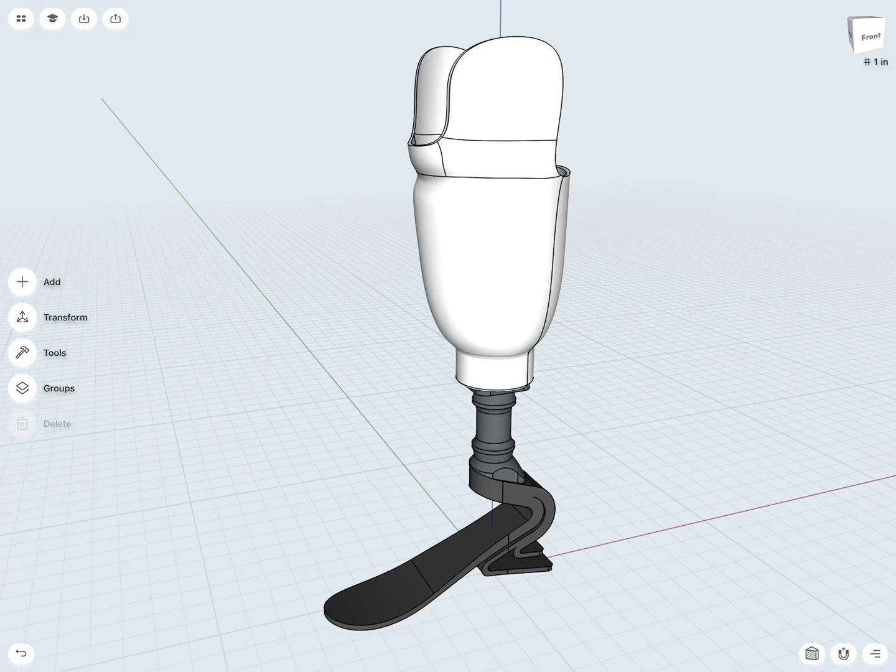Hello everybody and welcome to today's webinar in which I will show you how I would use Shapr3D's sketching and modeling tools to create everything you see under the white body, which is part of a prosthetic design and consultancy project I currently work on for a local prosthetic design company.

Before we continue, a few things to set up. As always, we can go to units. We want to make sure that we're not working with inches, we work with millimeters because we have to work in very small dimensions. So millimeters is very good to work. In appearances, based on preference, you can hide these edges. I keep them off for the moment. And on the lower area here, currently we turn snap to grid off.

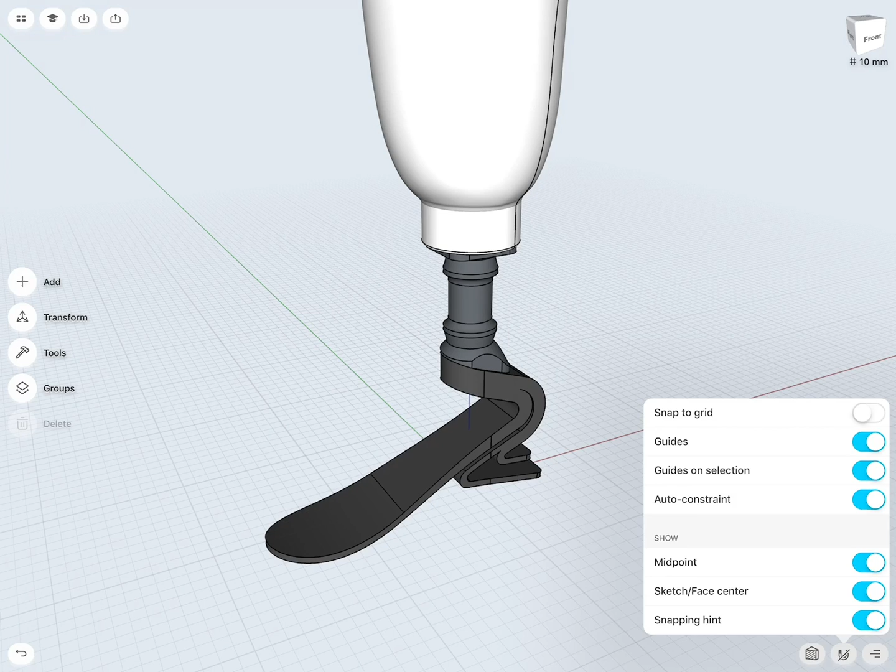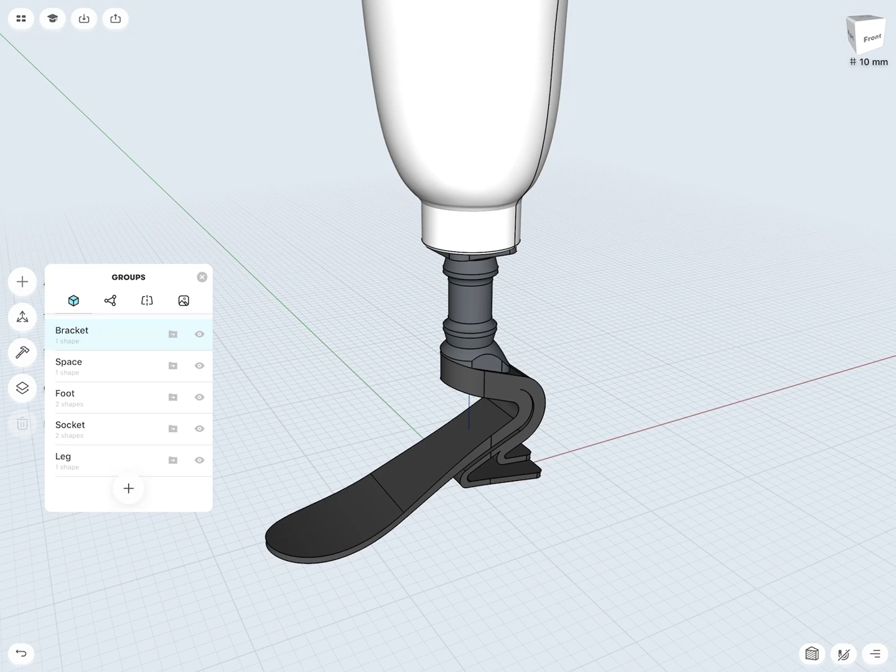The way I will structure today's webinar is simply with this geometry that's already built in as a backdrop. I will show you via sketching over the parts how I would construct all these individual elements. Also in terms of design management and improving your ability to quickly work on particular elements, you want to put nearly every object into a group. So I have the leg, the socket, the bracket, the spacer, and for example the foot. While the foot is made out of two parts, I just put this into one group. Okay, so let's focus on those elements we see here.

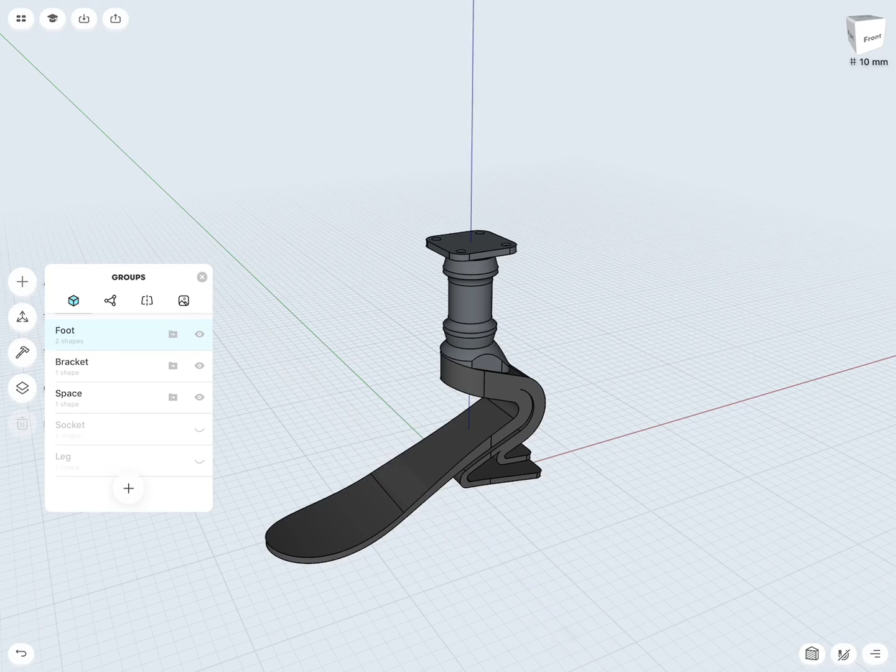What is really a good tip is try not to work somewhere off center. Try to really create your sketches and your model so it's nicely centered. For the simple fact, if we now go into the front view and then lower right corner, you see where my pen is. There are three icons. To the left, it looks like a piece of cheese with dashed lines. If I tap this one, you will see a cut section view.

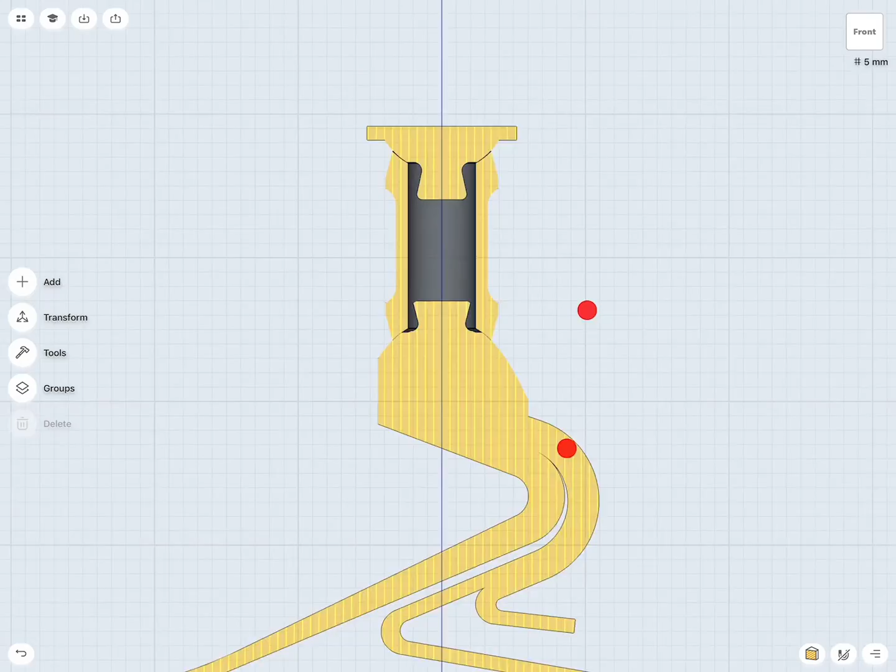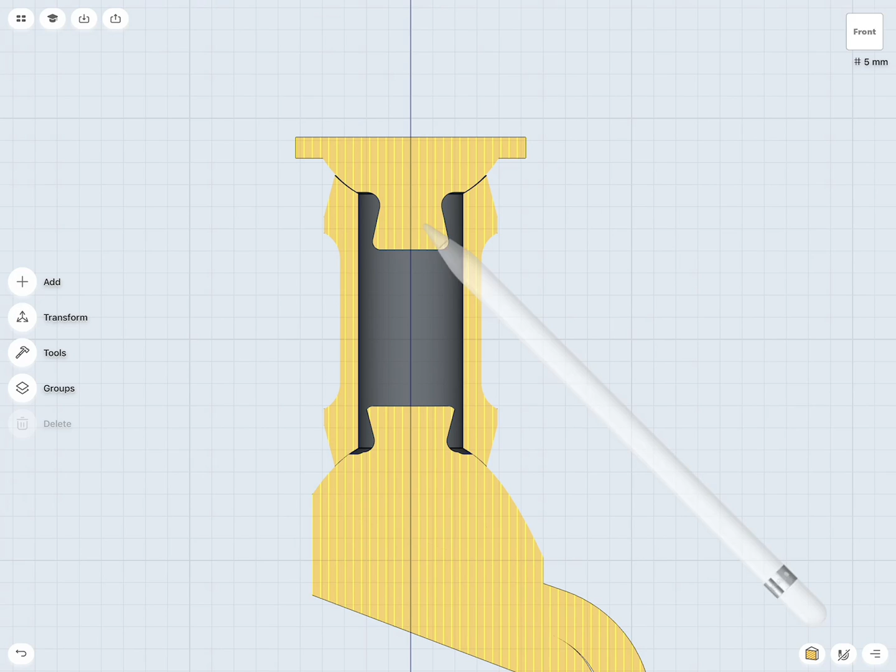And that's actually pretty great when we create geometry and then we want to look into everything to see if there is any interference. The way those were made, you see there are small gaps so they can rotate, because what's not in the model, there are actually some screws that are being pushed into this body, and with this they will secure the angular parts of the foot and the bracket.

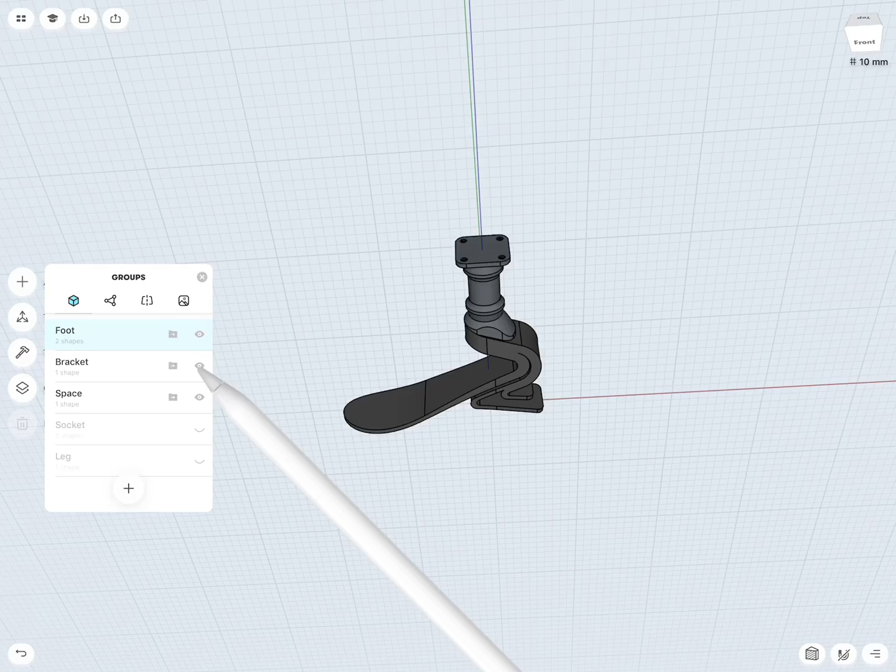Okay, so as an easy start, something I always tell my students, if you see a design like this, it might look very complex. Don't be afraid. Successful 3D modeling is really about trying to break everything down into the most logical elements and then step by step solving one problem after the next one. As a nice warm-up, let's take a look at this spacer. So this is not a custom designed piece. I can actually put it here. There you can see there are actually the screws. So this is something you can obviously buy.

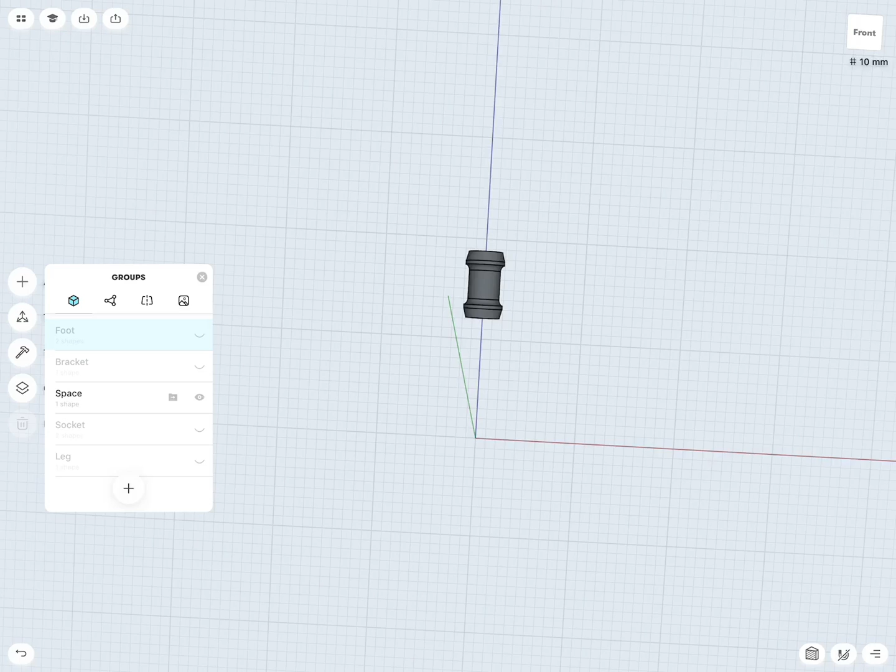Prosthetic design, particularly in today's time, when you do something for children who grow, you need to figure out how we can create these parts fast, maybe 3D print, which is a really nice technology today. So relying on custom parts is good. Being able to 3D print those and mass produce them quickly is better. I will create a new folder because I will use this as a sketch over. Then I turn on the cut section, so you will see what we are trying to do. Now, if we break this down into the individual elements, we have vertical lines, we have some curved elements, and here and there we have concave surfaces that work like the holder for a socket.

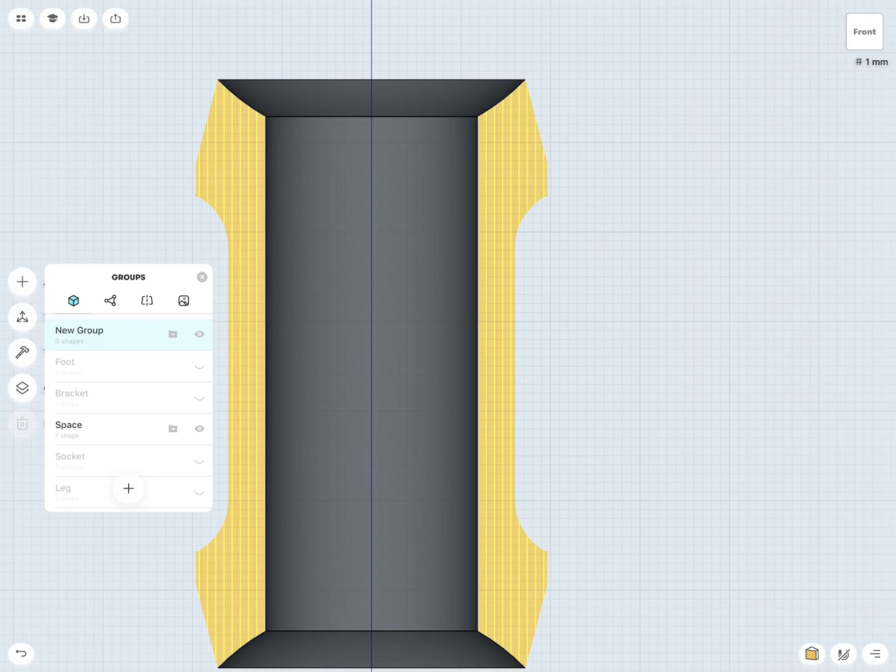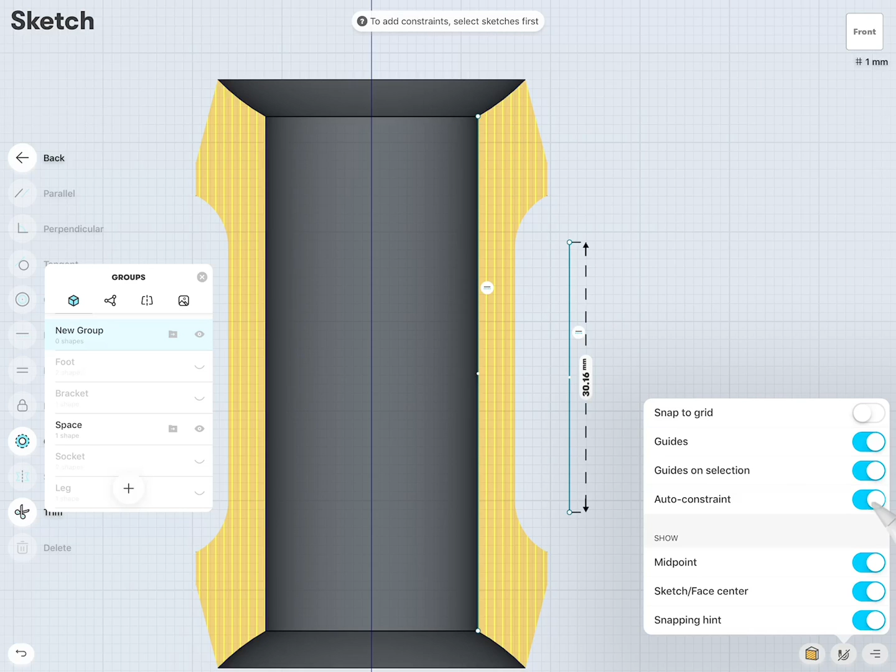So to create this now, I will draw the sketch here to the side, so you see a little bit how I do this step by step, and I can move this to where I need it. I have the grid turned off, so I'm freely able to move these elements to where I need to. Here I have a line, and I didn't mention this before, auto constraint is also turned on. You see this line which I drew straight vertical got a vertical constraint. If you draw this at an angle, not a big deal. Select the line with the pencil, and then on the left there's a horizontal vertical constraint, and we can fix this. Very good. Then I move this one to there.

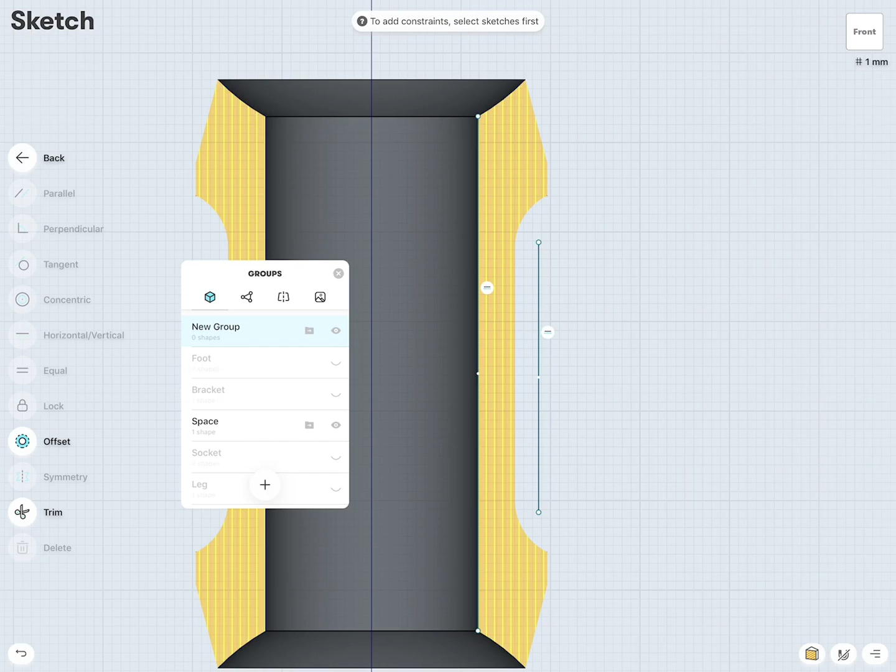And these two lines I would like to be aligned vertically. How do we do this? The lines in the new version of Shapr3D display the midpoints. And I can draw a line from a midpoint to the other midpoint. When I select this line and make it horizontal, now the two lines, this one and this one, are vertically justified. Let's bring this one back. This also means if I move this one up and down, you see the other side adjusts. So it's really quick to do this.

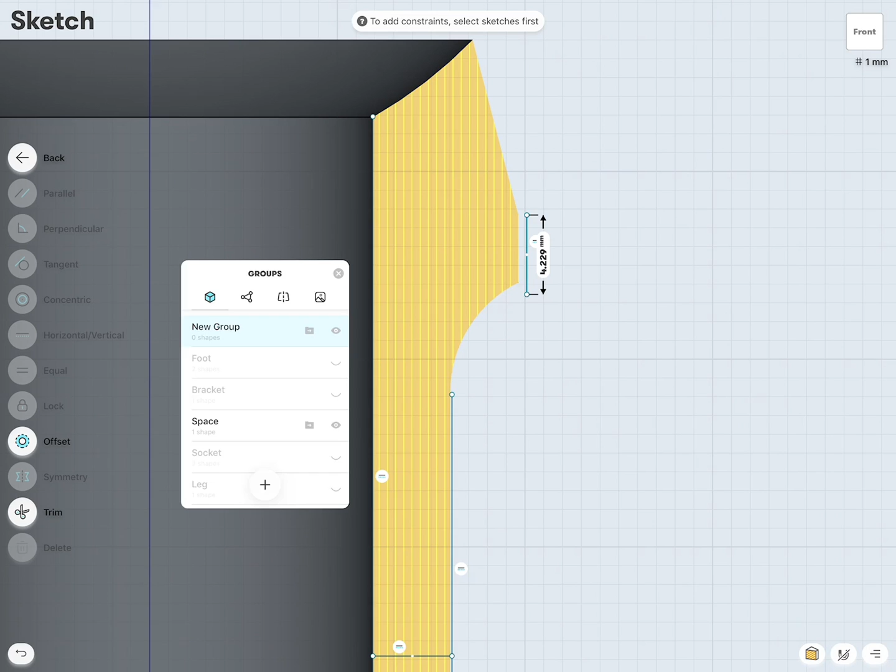Here, this looks like a vertical line we have kind of there. So I bring this line to there and there. Get this a little bit closer. Zoom in. For those who are new to Shapr3D, you see what's really nice with the grid is when you zoom in, it actually gets finer.

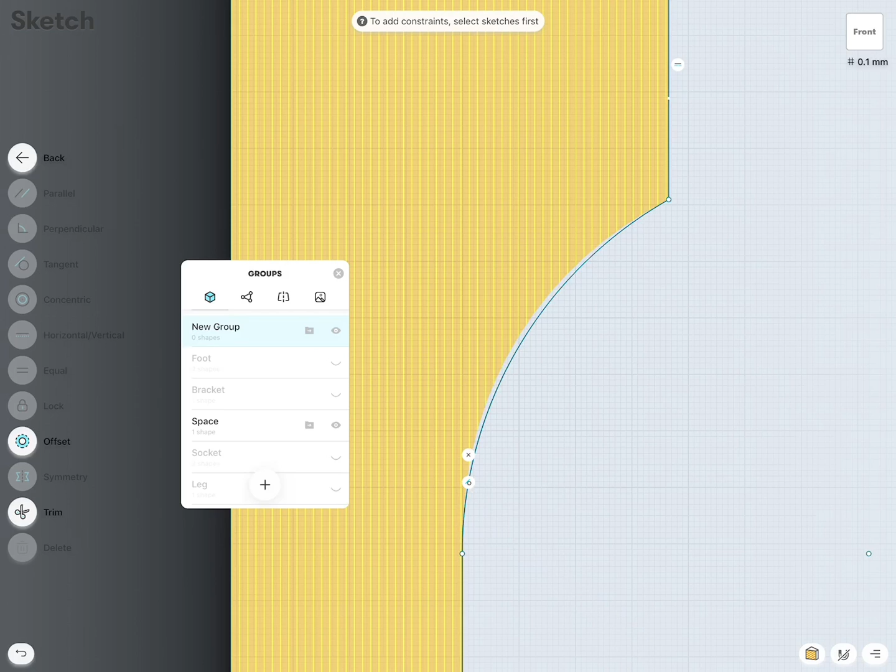And now I would like to connect an arc from here to there. So with the pencil, I started drawing from there, and then I wiggle my pen and move this point to the end so it snaps. Very good. And there you see, there we also have this constraint for tangency. In case somebody does not see it, what this means basically is that the arc perfectly tangentially flows into this line, which is what we want. So we can select the arc and the line, click tangent, done.

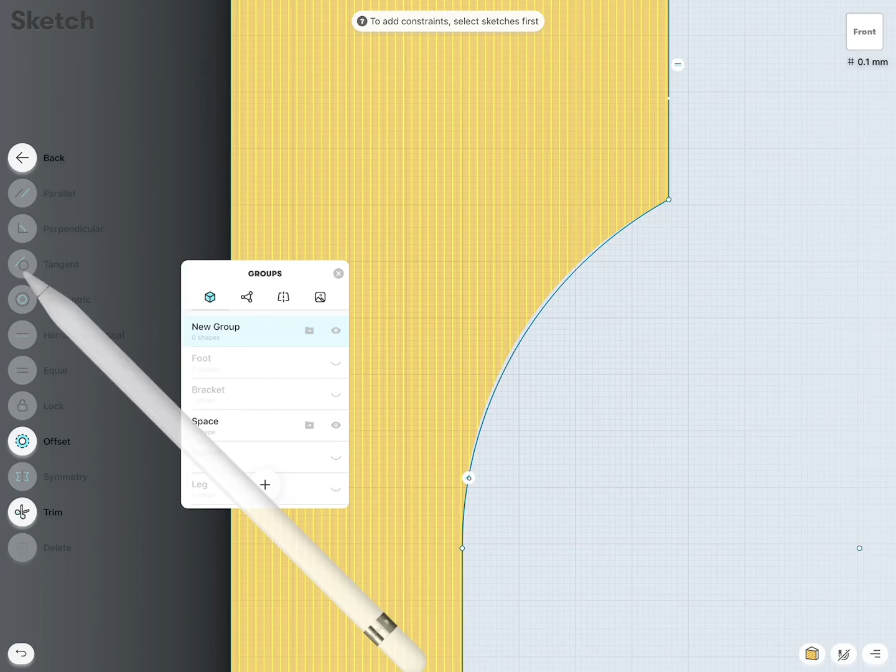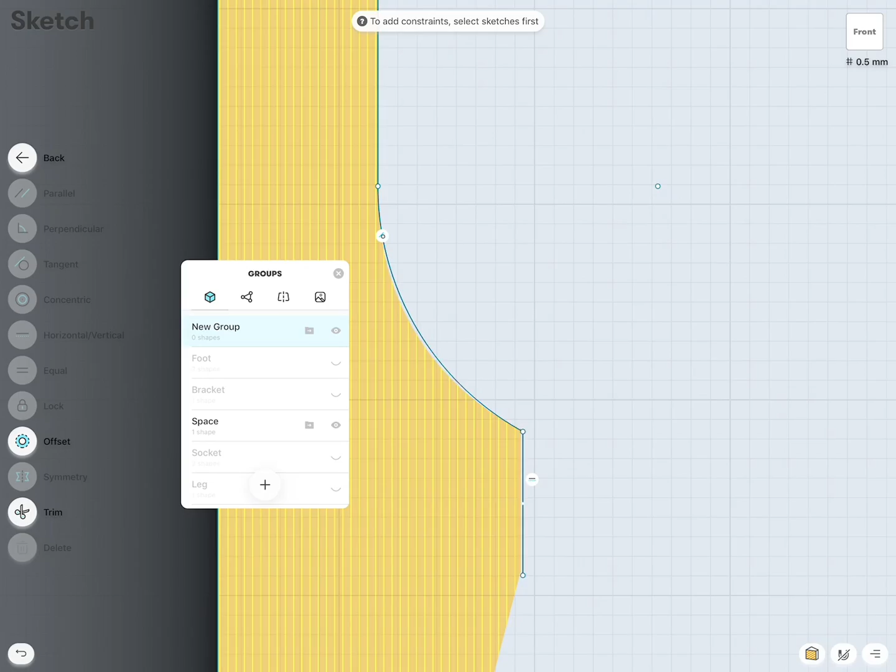Let's do the same down here. We draw a line, then we draw our arc. The tangency was created, and at this point I can position to there. If I want to, this line, I can give a dimension 3.5. Let's clean this up a little bit.

This line on the bottom I can give the same dimension, but to make life a little bit easier, in case I adjust the upper line, I select both lines, and then I will give them the equal constraint. And that basically means the lower line is always as long or equal as the other line. Let's make this one 6, and you see the lower line updated. So it cuts your work by 50% down, which is good.

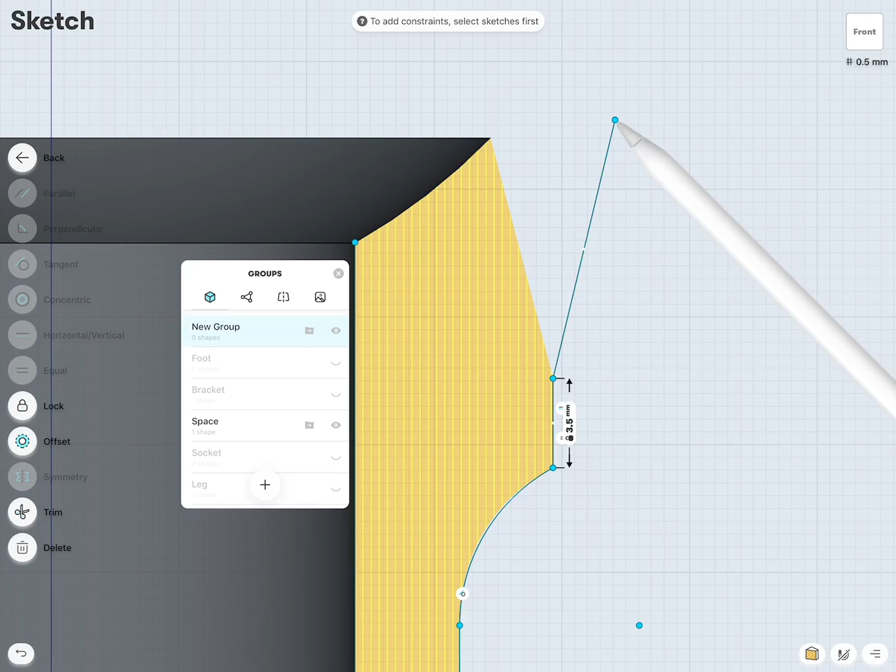Then from here we draw a line. You notice drawing a line out, because I'm working in a cut section view of the 3D geometry, the software tells you it's not so easy. So instead of drawing from this point a line away, I draw from somewhere else and terminate the line at this point. And then, whoops, the upper point I select with the pencil and move to there. Very good.

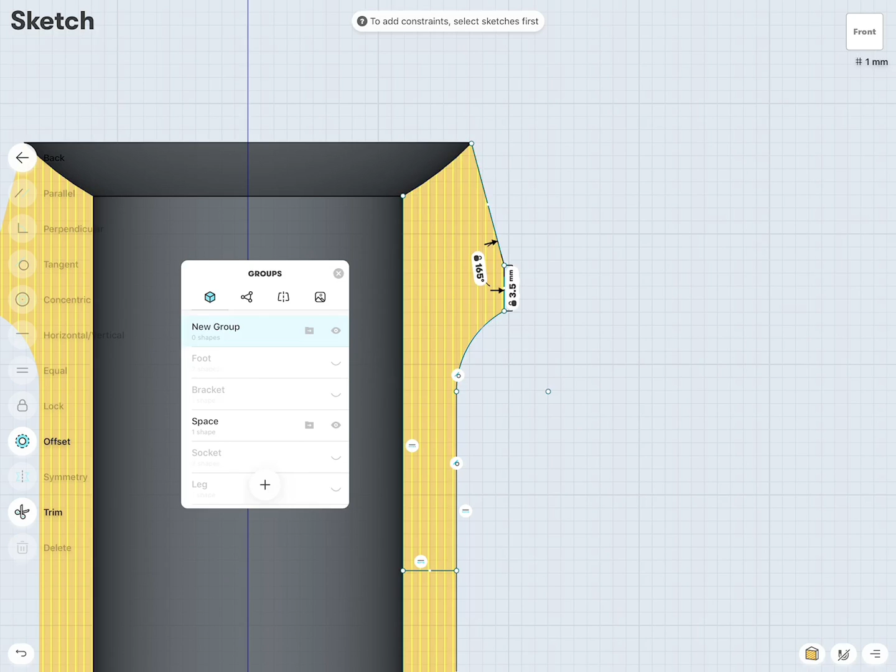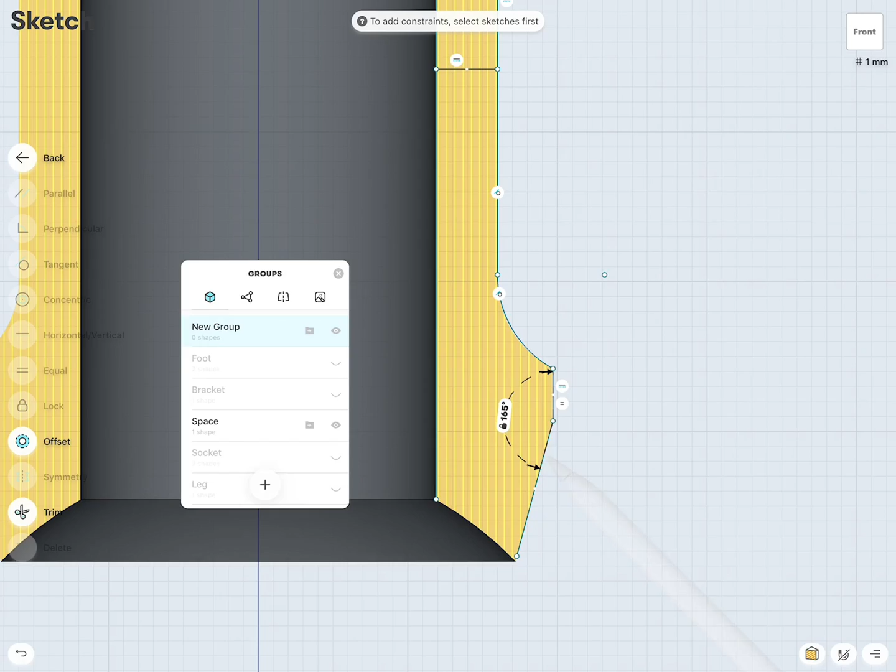To specify, we can also give this an angle. So with the pencil I select both lines, 165 degrees, and say that's locked. Also here we can give this an aligned dimension. So let's do the same here, 165 for the degree. And then this line and this line. Careful where you click or tap. We make it equal. Very nice.

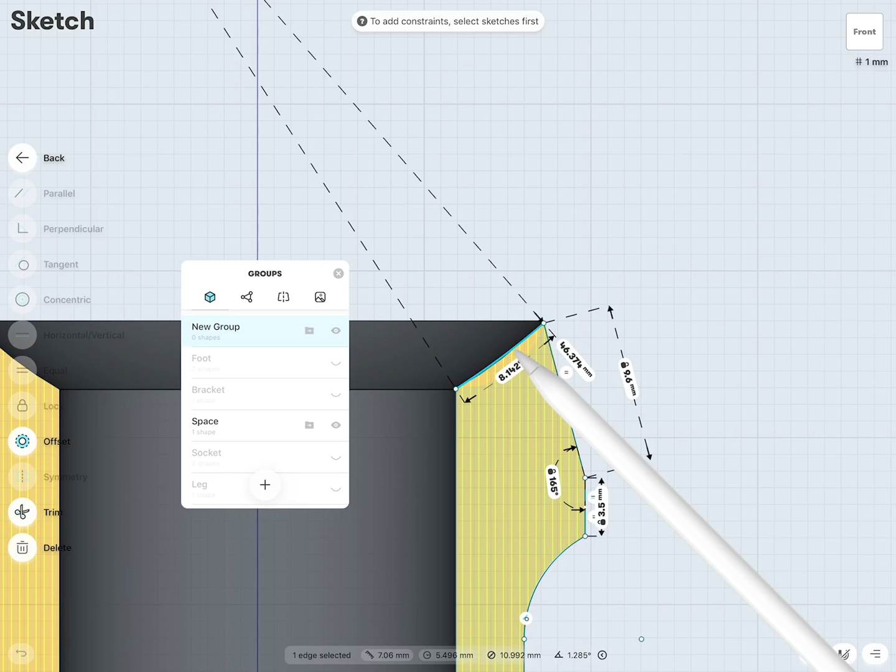Good. So how do we solve now the arc? I will turn off the spacer group, and then from here draw myself an arc. I can then actually show the spacer again. And I need to adjust the radius now. So I can, with the pencil, drag the arc, and it looks like maybe, let's say 9, 12. Oh, this one moved a little bit. So maybe by hand, via dragging, we can do this 12.

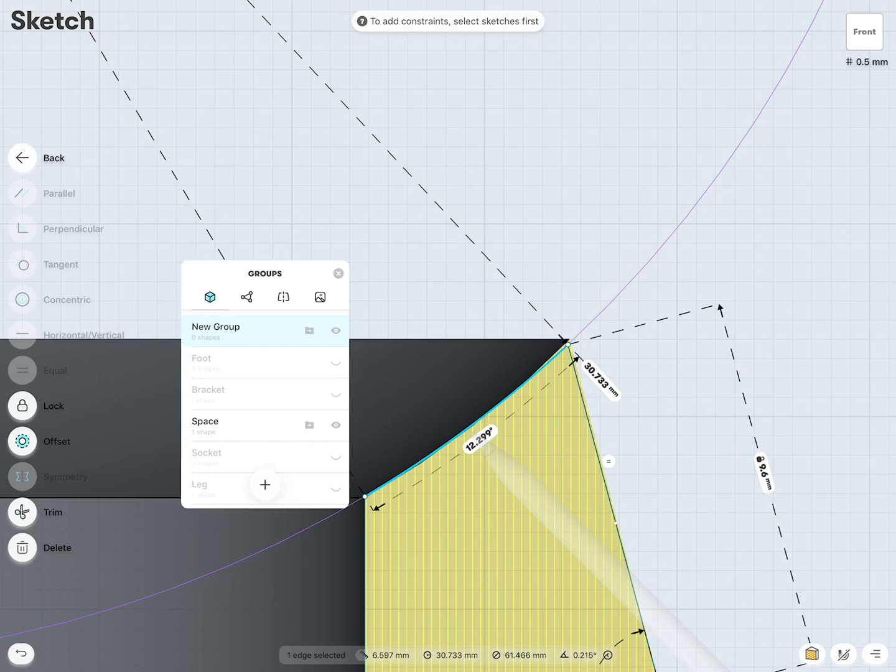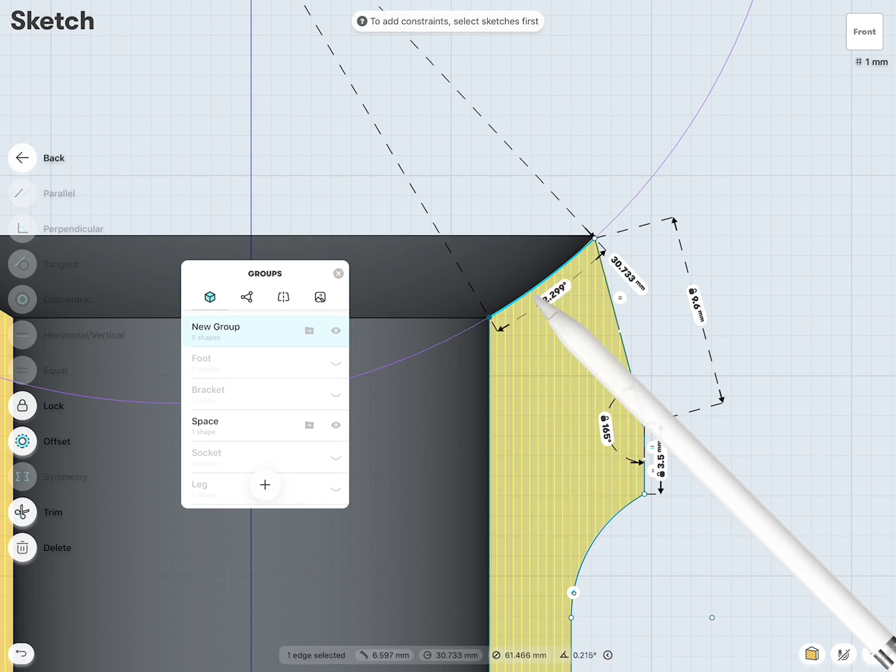Okay. So one little tip, also you notice when I type in a different angle here, the sketch adjusted, see this line moved. To prevent this, I can select this line and on the left add the lock command, and that basically stabilizes that line. So when I add a different angle there, now we have the opposite side, so we have to lock this too, and now we can specify this as needed.

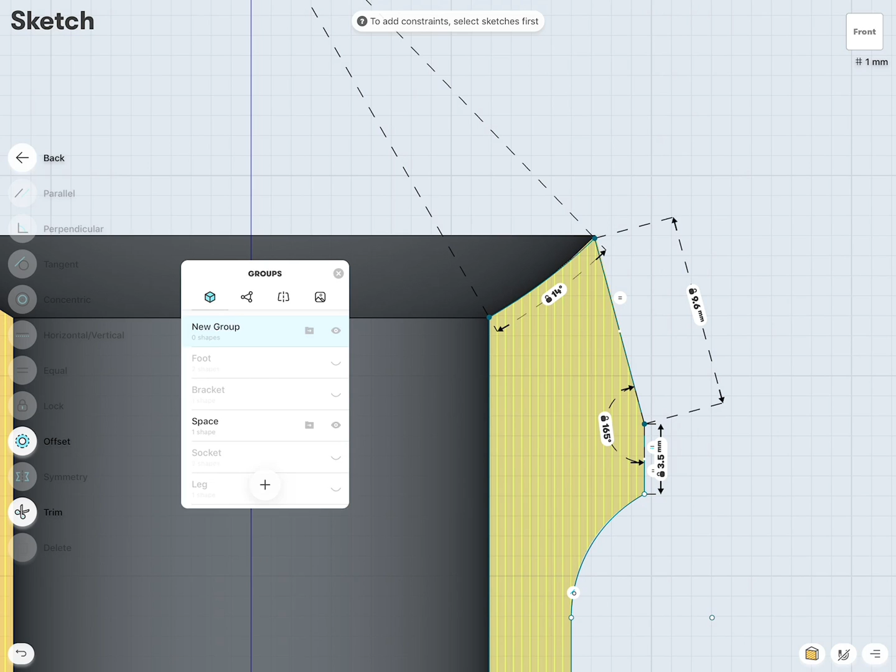So why does this happen? For those who are not familiar with it, this is a sketch solver. So with all these constraints, what you see on the left side, these icons and dimensions, we try to create a rigid structure. And the solver always tries to, well, solve automatically what it assumes we want to do. That is sometimes very easy to do for the software and sometimes not so easy. So we help it by giving it some extra constraints, like locking these lines, so I can now give a dimension to the degree of that arc.

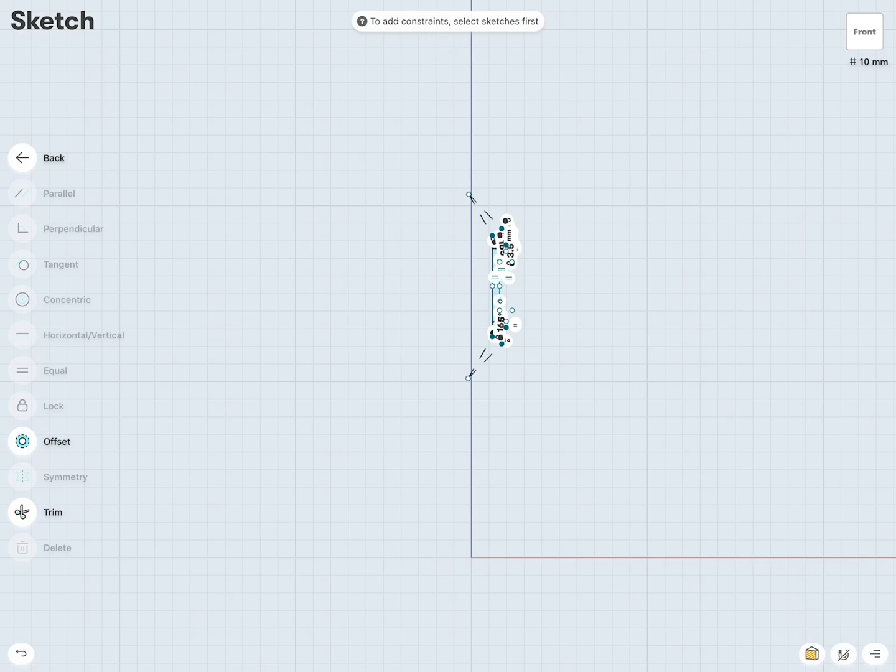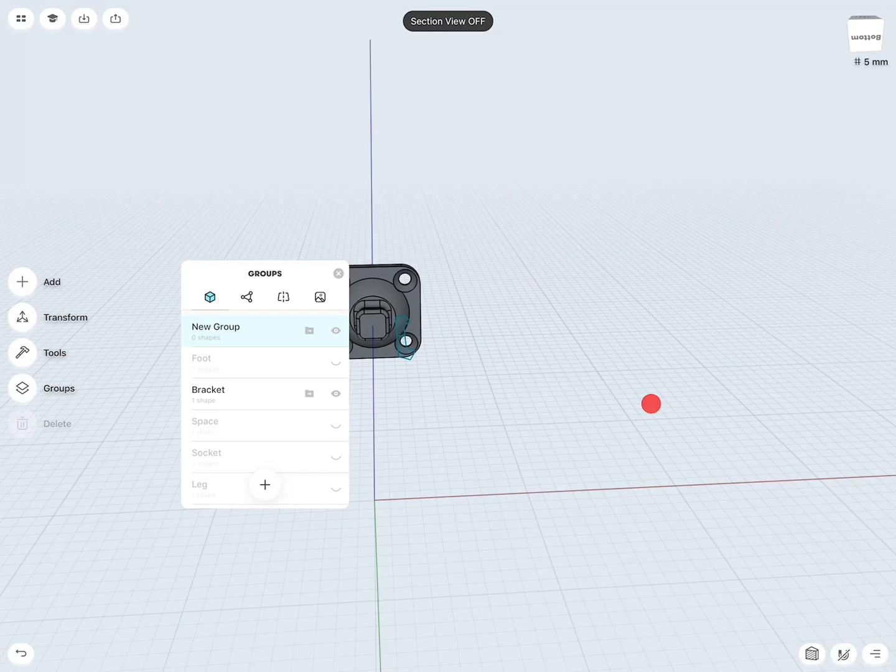Very good. So let's take a look at the spacer. That's very nice. And what I will do now is I want to revolve that filled blue area, which is a closed shape, but before I do this, I need to have a center axis. In my design, I will need to use the axis tool a little bit more, for example, for creating these holes and then rotating them around an axis. And I mentioned before, try to build everything centered on a sketch. So I will add a center axis, construction axis.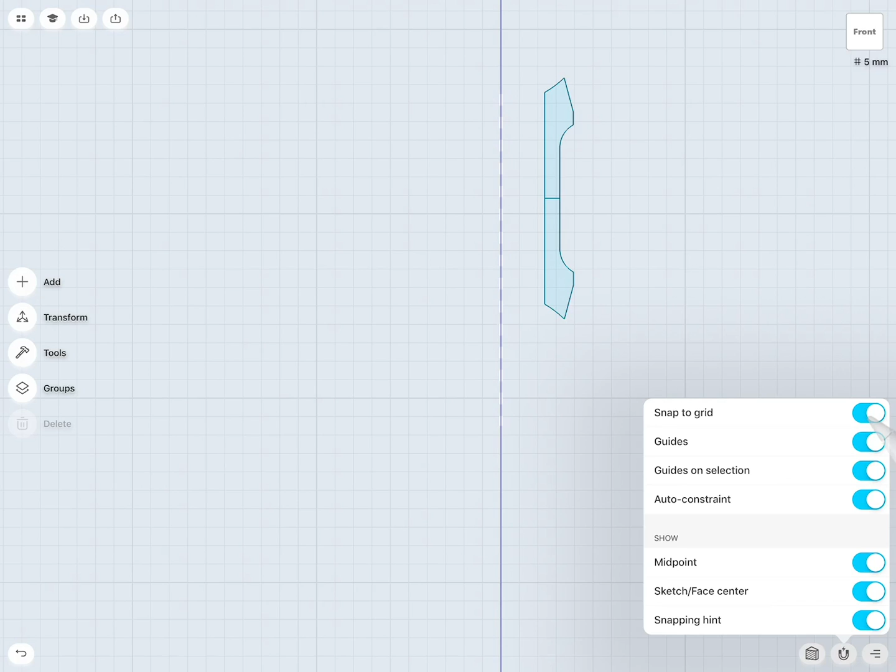In this case, no, because I can position this how I want, and I can draw the axis to there and there and there. I snap to the grid. Sometimes it's also good for this task to have the snap to grid turned on, so your construction lines are not misaligned. They have to be really perfectly at the world center. Let's zoom in a little bit, and yep, it is centered.

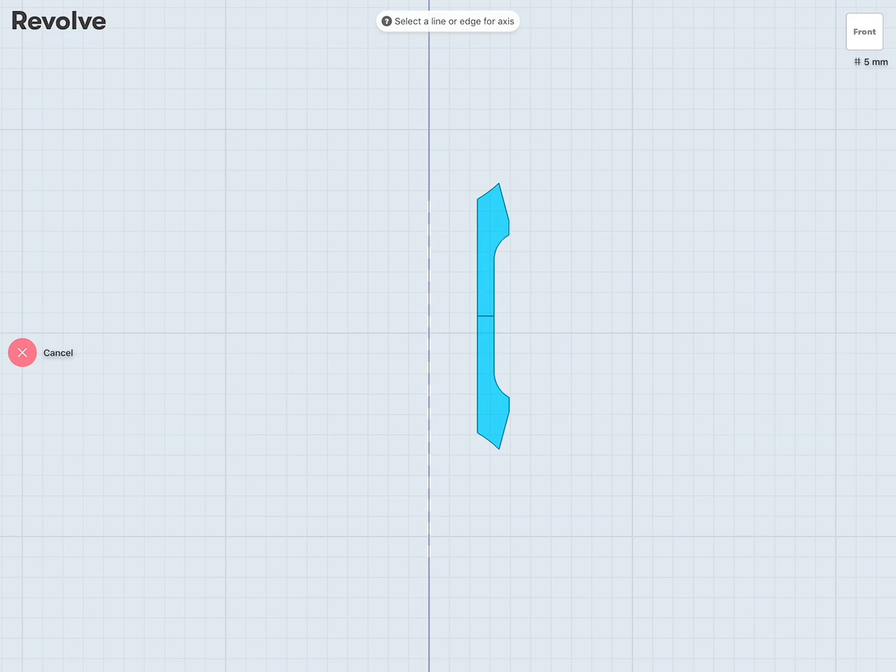So this line I created, because now I can go to Tools, then Revolve, select these two filled surfaces, click Next. It asks me on top, select a line or edge for an axis. So here's my construction line, 360 degree, that is what I want, so like a complete pass. Click Done, and there we are. So this was a nice quick introduction into creating this particular part.

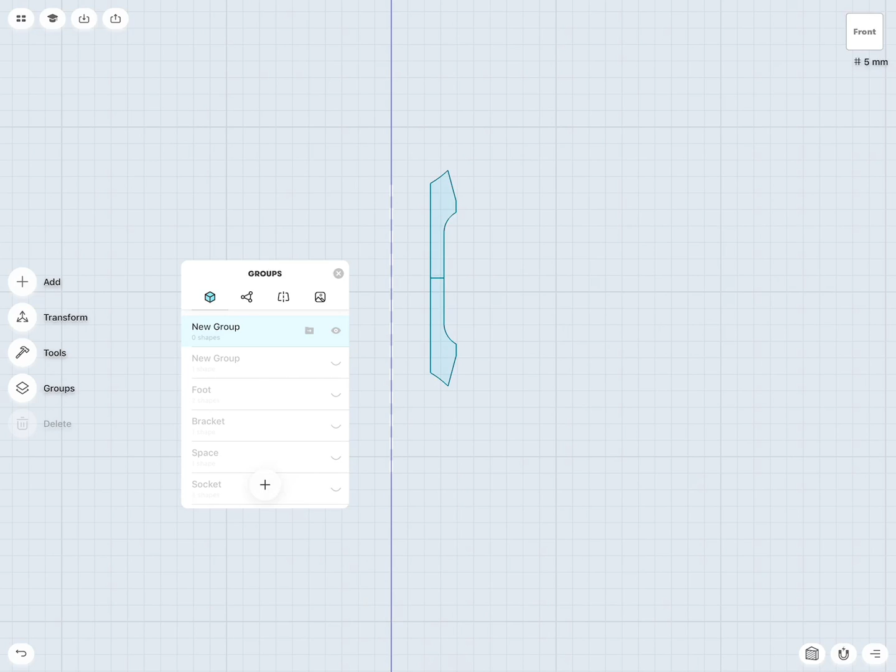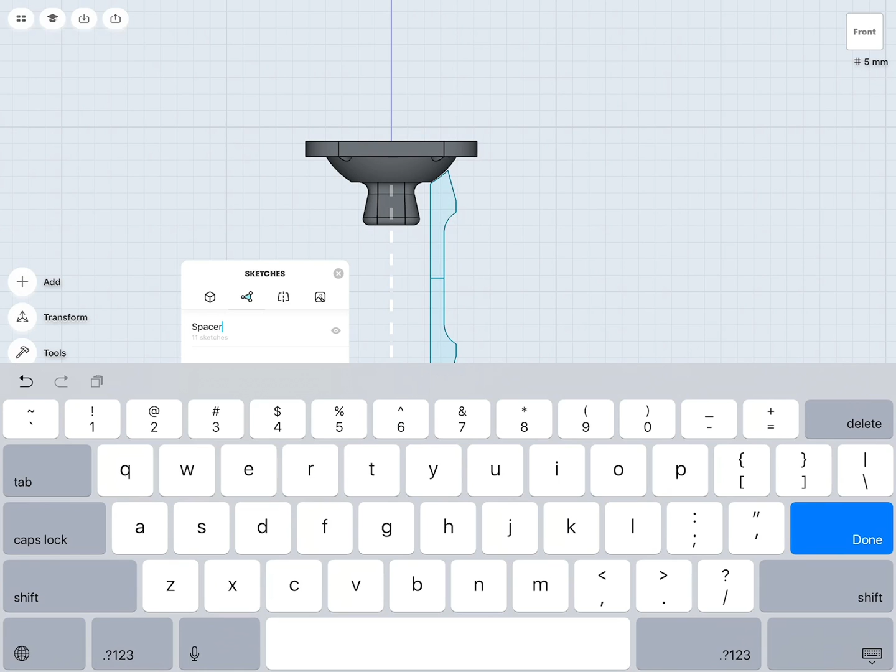Let's take a look at how we can create this bracket. But before we continue, get into the good habit of naming all your sketches. So right now this says sketch 11. Via showing and hiding, I could figure out what that sketch does or what it's being used for. Swipe to the left, and then we can give this a logical name, spacer.

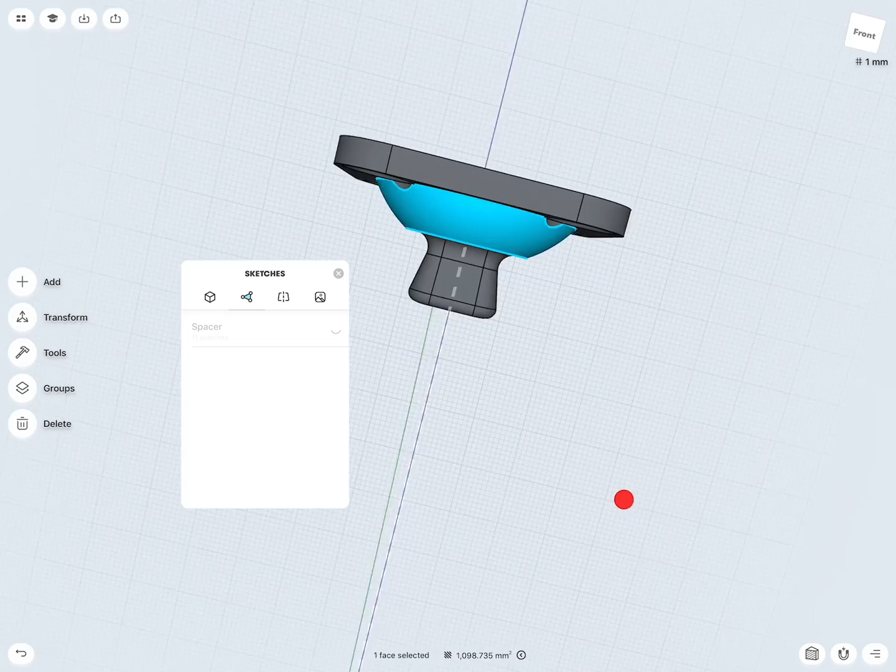So let's take a look at this part. This looks pretty complex. It's actually not really complex. So we have 4 holes. We have kind of like a piece of a sphere sitting on there. That's a revolve. Then here this looks like a square with rounded edges, so that's actually a cubical extrusion, and then we later round these edges.

And this really looks like a piece of headache. Not really, it's just a basic square, extruded up, tapered, so it gets smaller at the top, and then we round the respective edges. Okay, so let's do this. How do we start? We didn't really talk about construction planes yet. And this is also a good moment to maybe talk about if you get a CAD model and you have to use it to redesign or further improve on it. We can now be very precise and rebuild something like this pretty closely.

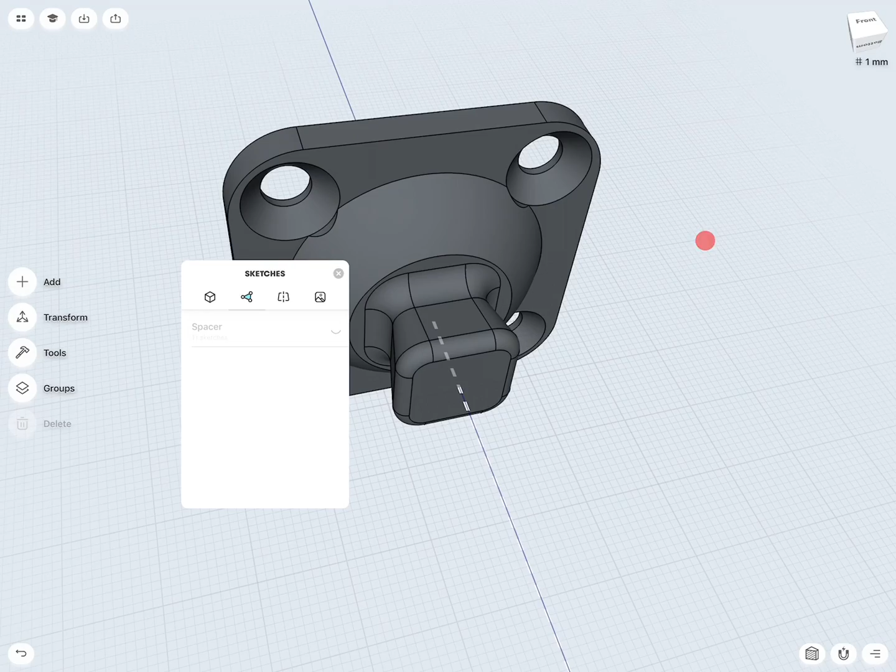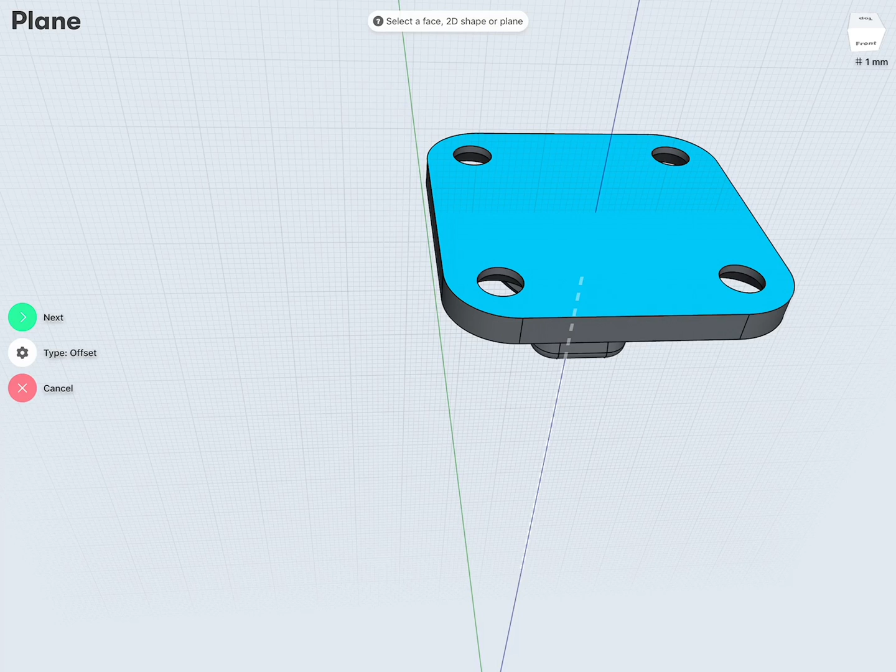I will start with this top square. On this blue face, I will create a construction plane. So go to Add, Construction Plane. I can, with the pencil, select this face. Type offset is good. Click Next. And then we don't offset, simply say 0 and select Done. Very good.

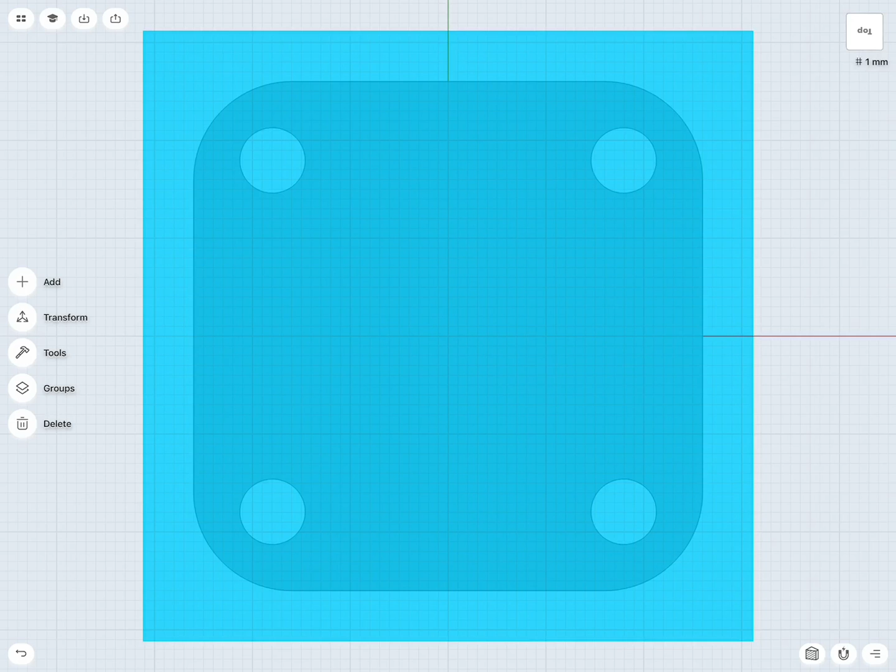With the pencil, we can select now this construction plane and then finger double tap. You can see it snaps two-dimensionally to that plane. To prevent interacting with the scan data or the existing computer model, I will hide this for the moment, and I will just somewhere create myself a rectangle. So I did this on purpose, a little bit crooked. Select the line, make this horizontal. This line is horizontal, and then these lines left and right, they have their respective perpendicular constraints. You can keep it this way, or if you rather want to work just with horizontal and vertical, we remove them and then re-add them back.

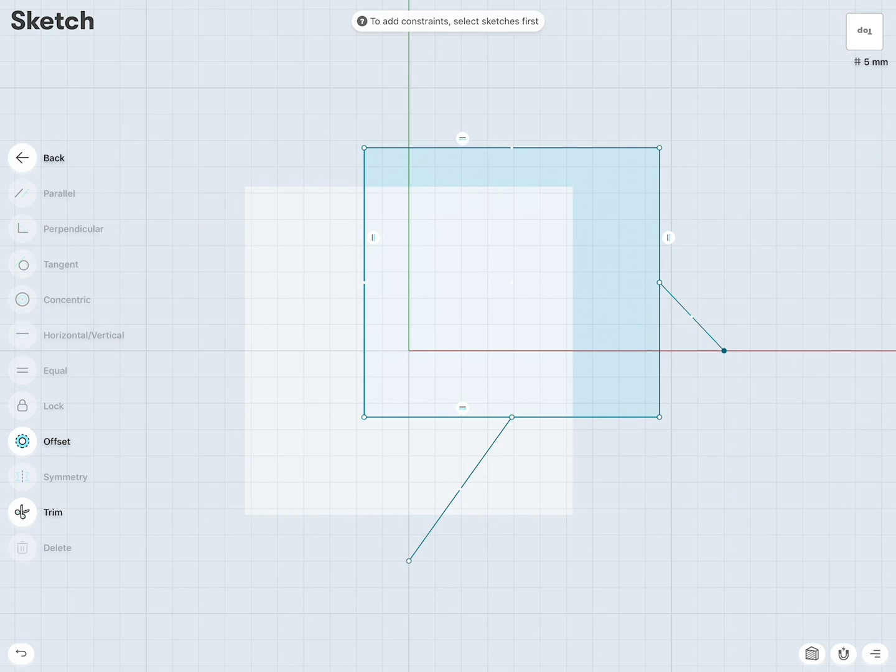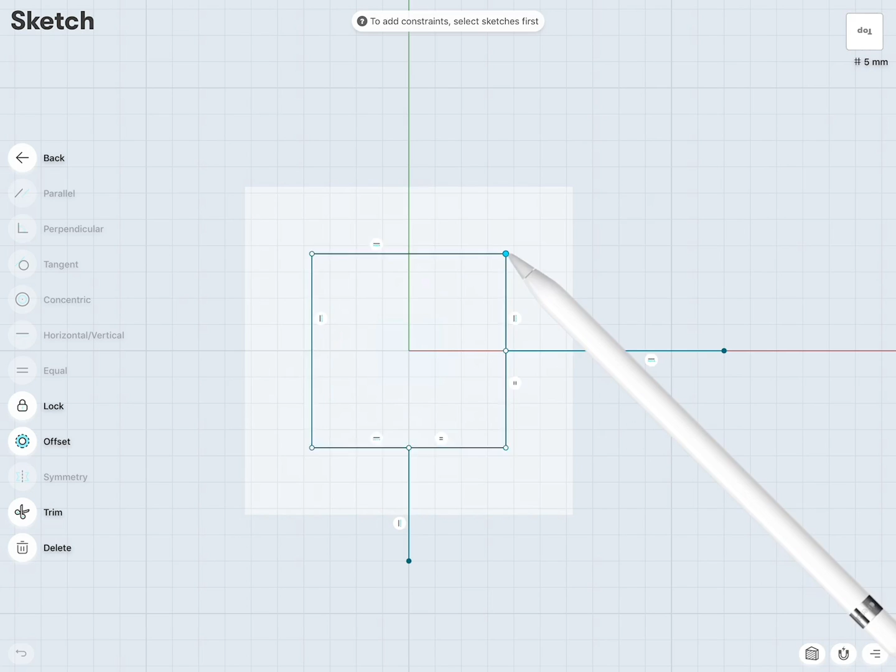So how do we now center actually this rectangle? Again, I have the snap to grid turned on, and check this out. I draw a line from the Y and the X axis and snap it to the midpoint of these lines. And then this point I lock by selecting the lock icon, horizontal, vertical, perfect. These two lines, they should be the same. Select them, make them equal. And now I can select one point and drag it out, and you see the rectangle scales from the center proportionally. Awesome.

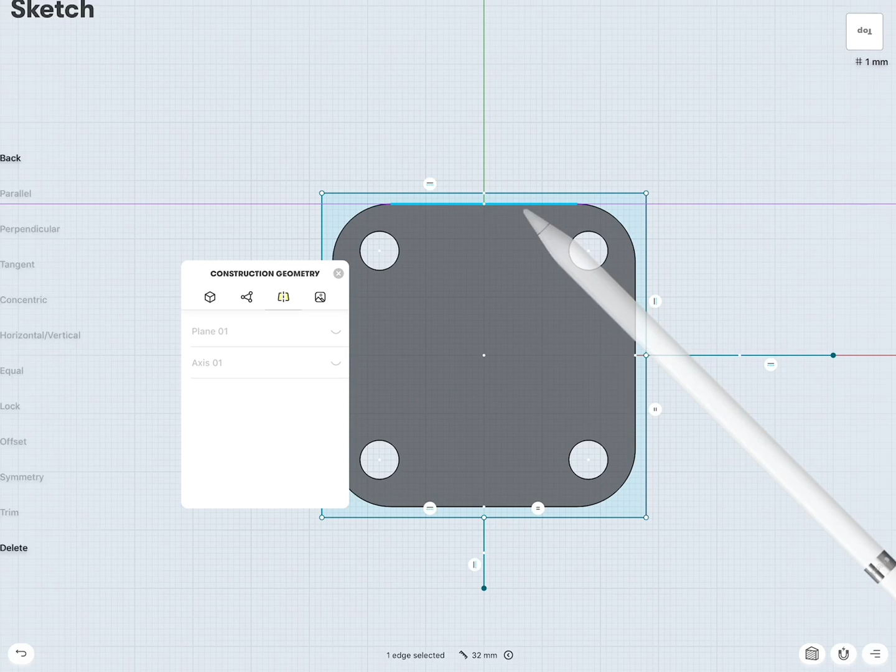Let's go back. We have to go to groups, show our bracket, because I need to now figure out the distance. This construction plane we can now hide. We don't need it for the moment. And we click there and click this line. It tells us, hey, this is 52 millimeters. So the distance between these two lines, 52 millimeters, select this line, 52 there. So I don't drag these points till it meets the bracket. If I want to be very precise, I actually measure it and then enter the correct dimension.

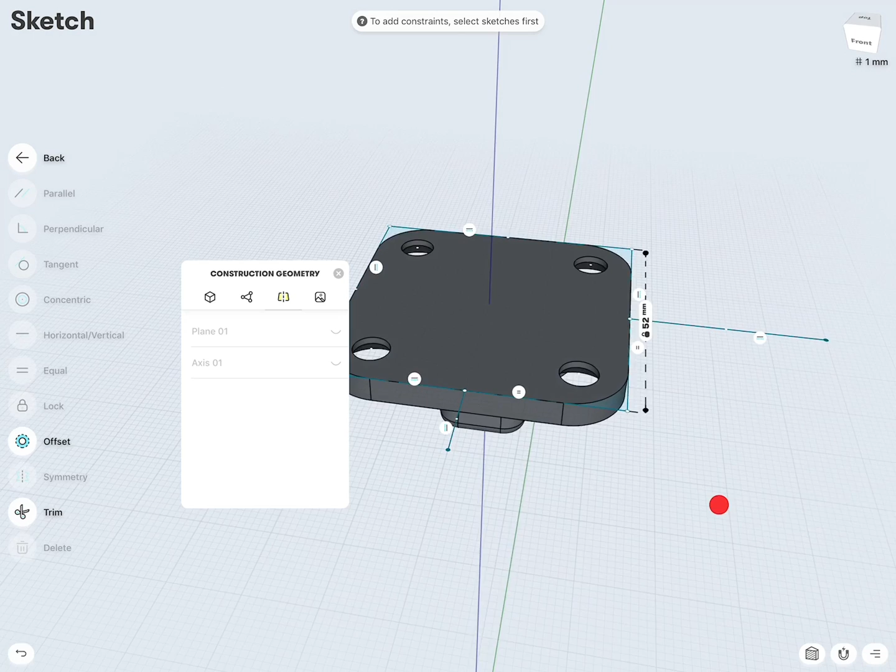So we want to extrude this one down, but for how long do we have to do it? Again, here I can select a line, 4.7 millimeters. Let's maybe call this new bracket. I will hide this so I don't interact with it. With the pencil I can select this rectangle, and then push and pull this down. There's a dimension, 4.7 millimeters. Let's compare. Yeah, it fits.

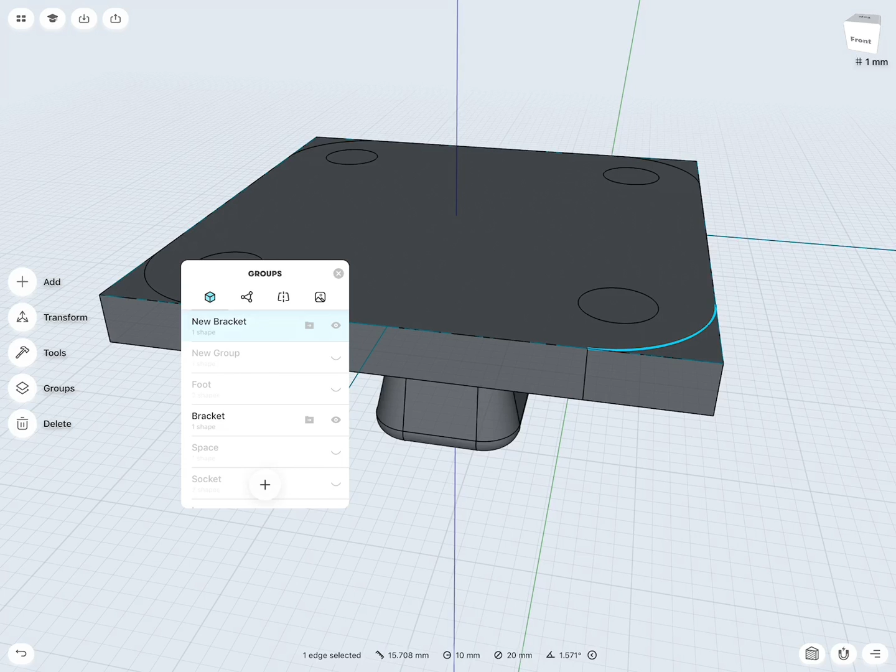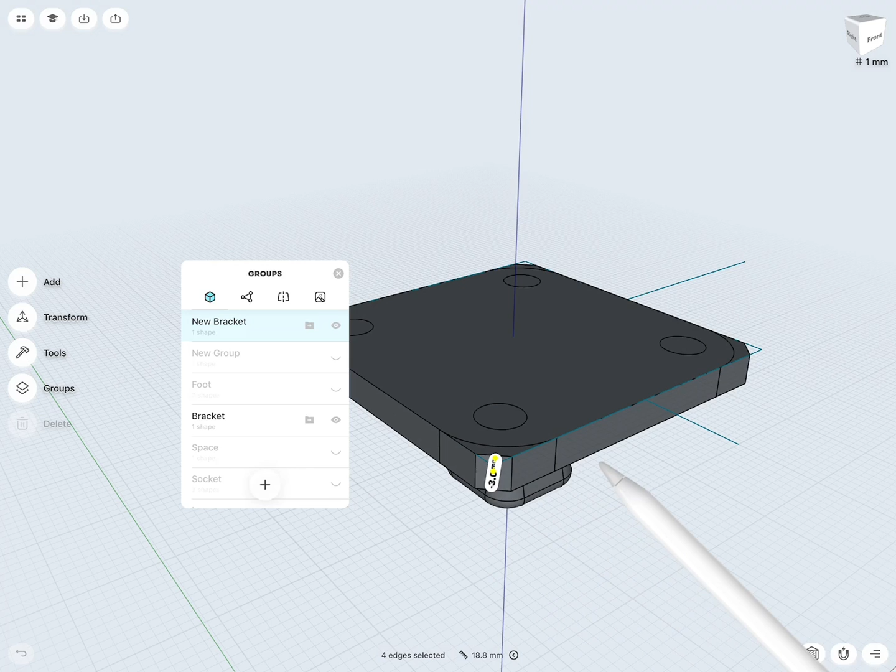And if I select this arc, there we also see some of the dimensions, so 10 millimeters. I can use that and memorize it, or in this case, here we try to eyeball it. I select all 4 edges and then with the pencil swipe to the left or the right, which switches between fillet and chamfer. And there we see 10 millimeters. That's what we need. There it's rounded. Very easy. Okay, so that's part one.

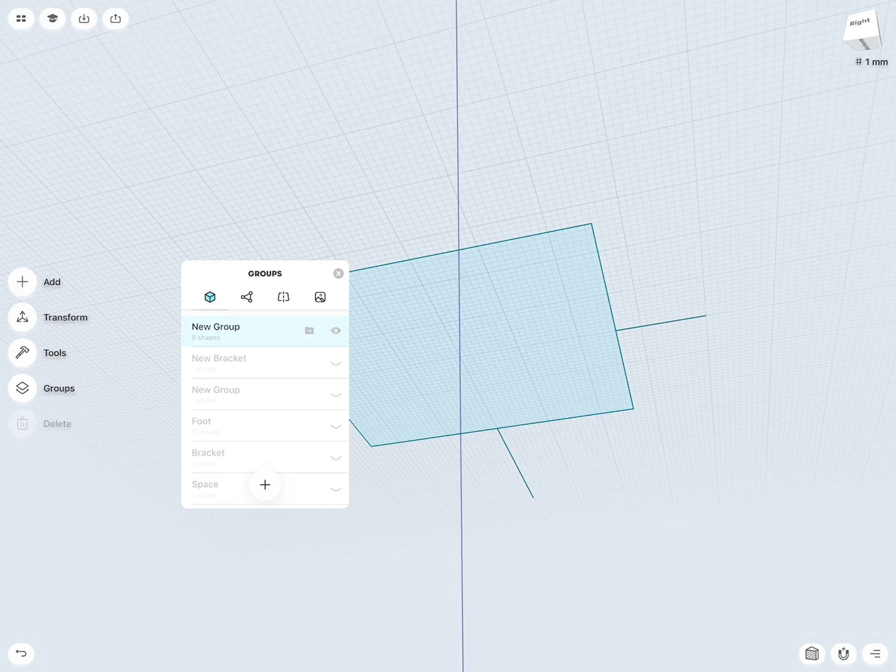I will make a new group for the moment, so this is not always in my view. I will also hide actually the sketch. I could give this a name, maybe bracket plate top. So we don't spend too much time on working clean, I will skip this step and just verbally tell you what you could do to structure everything more efficiently. Now we will do the same with the bottom part and add a construction plane there. Also here 0 and done.

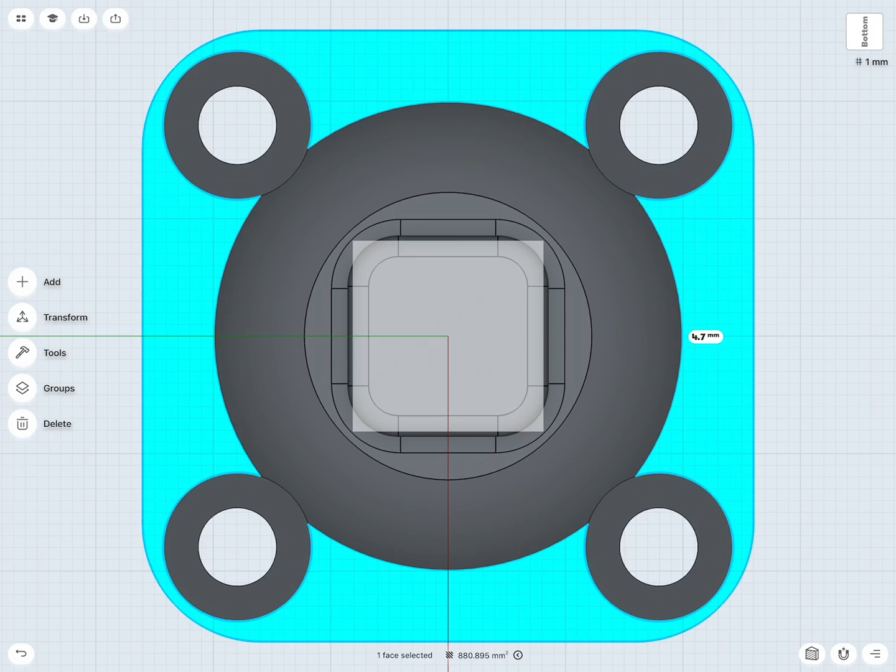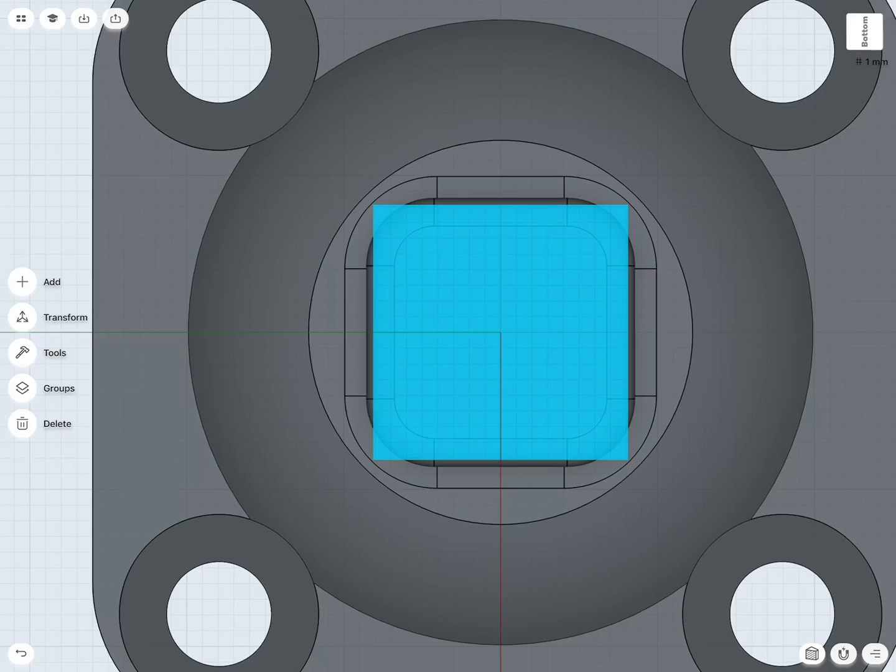So why did I create these construction planes? Because I could select a face, double tap, and then it creates a sketch there too. Yeah, so that's possible too. With the construction plane, I always have something two-dimensional I could select and then tap to. That's kind of like my preference for it. Now I need to do a little bit of reverse engineering here. So we need to figure out the rectangle we need, and then we need to figure out the angle.

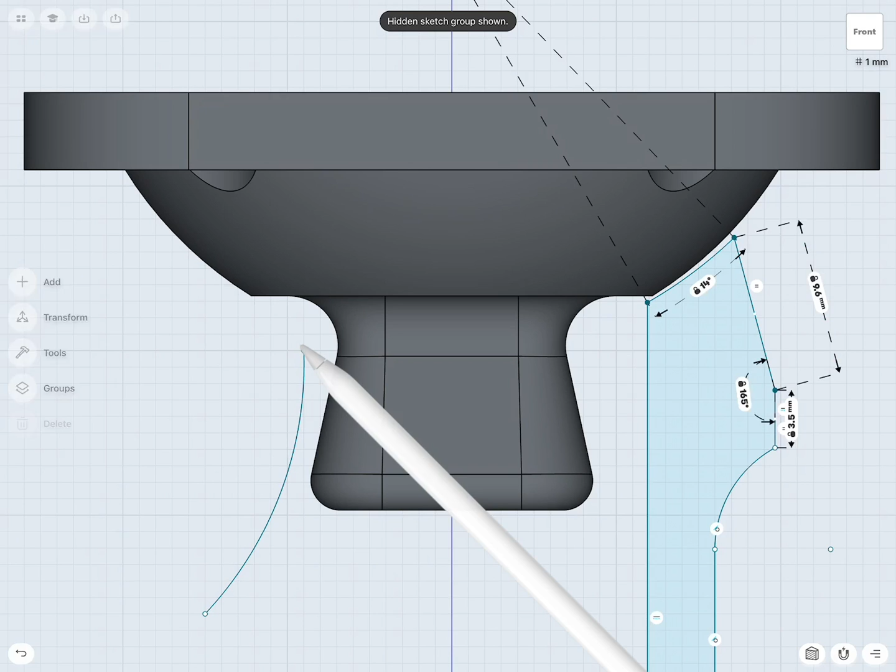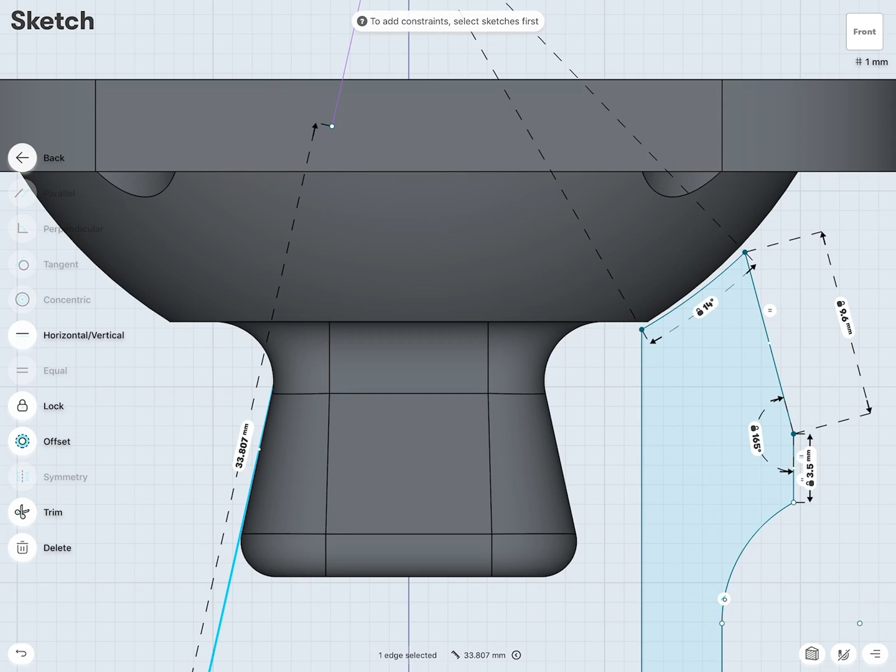Before I continue, in this case, I will go to the front and draw myself not an arc, just a line. This line, I will maybe put it there, make it a little bit bigger. I will turn the snapping off, and I just try to hit the right angle. I can select the line, move this one in. Yeah, this actually is very close. Good. It's actually 77 degrees. Okay, I just wanted to know that. You will see why I did this step first.

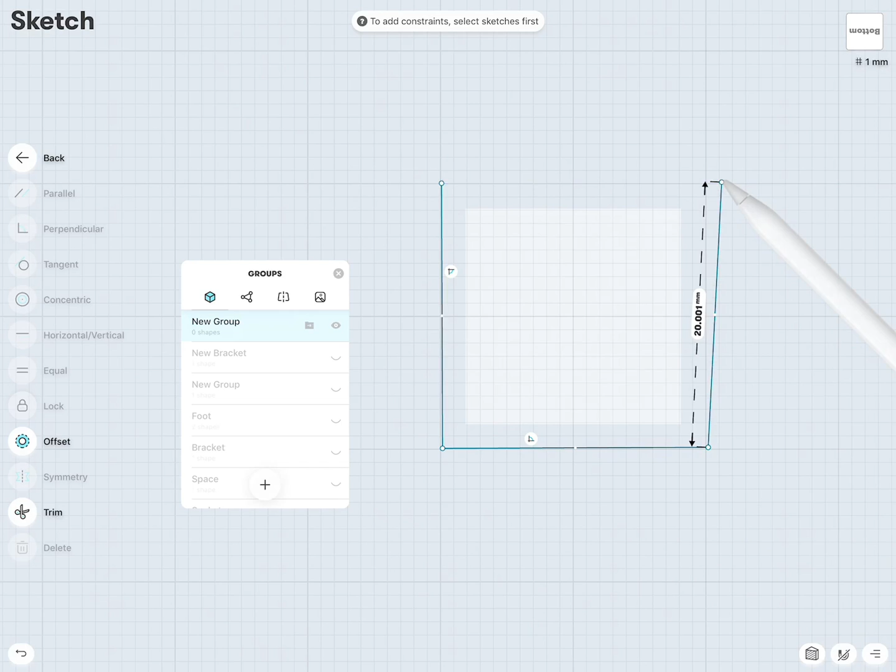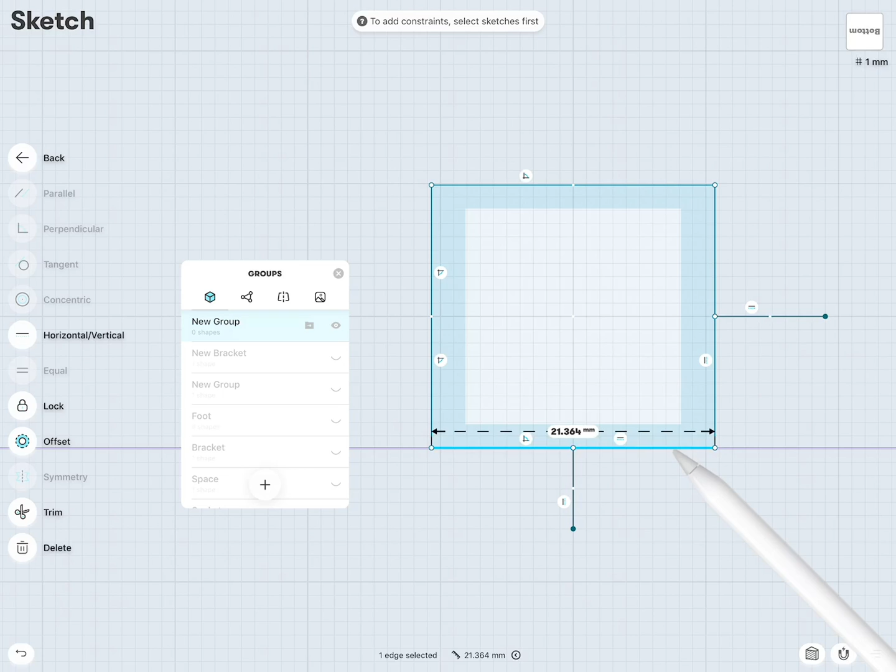Where's my construction plane? There it is. Nope. There. Double tap. Okay. So here we will do exactly the same step again. Make some rectangles. I do not have snap to grid turned on. There. And there. Then we lock this dot, here, horizontal, vertical, horizontal, vertical, and the others are set via perpendicular, equal.

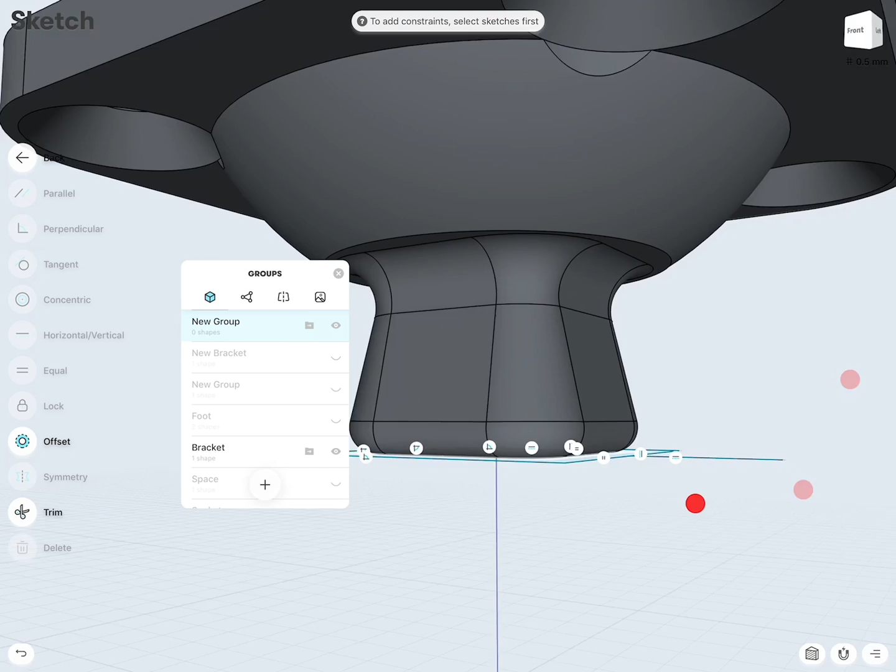I don't really know actually the dimension that much I need, because the edges are rounded, so I have to guess a little bit. So we have to model, and then we can see does it hit or not. But you remember I also created this other sketch with that line. So I need to move this point down till I get to a point where actually this line intersects this line. And then actually I know if I extrude this face up and then taper it, I will hit

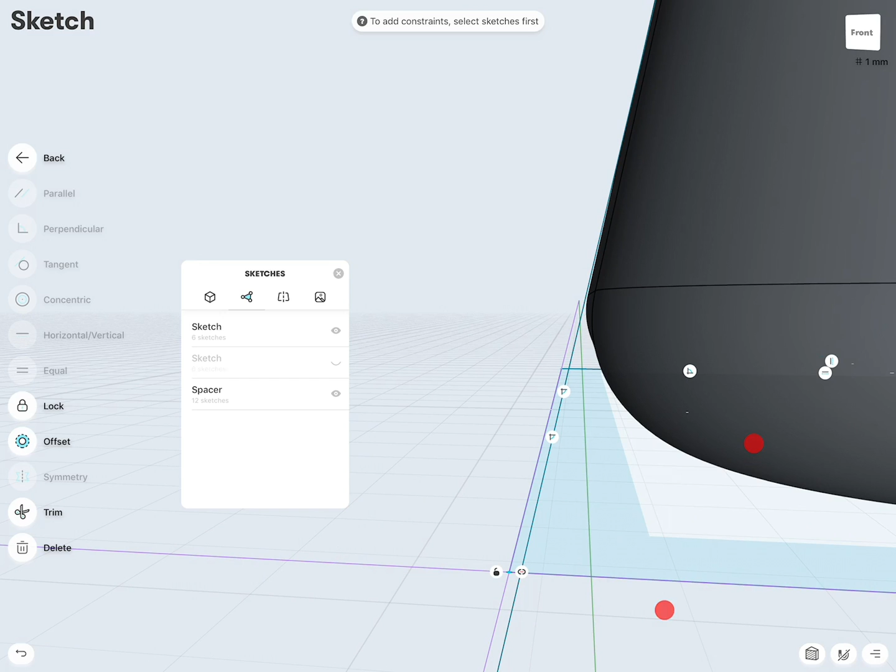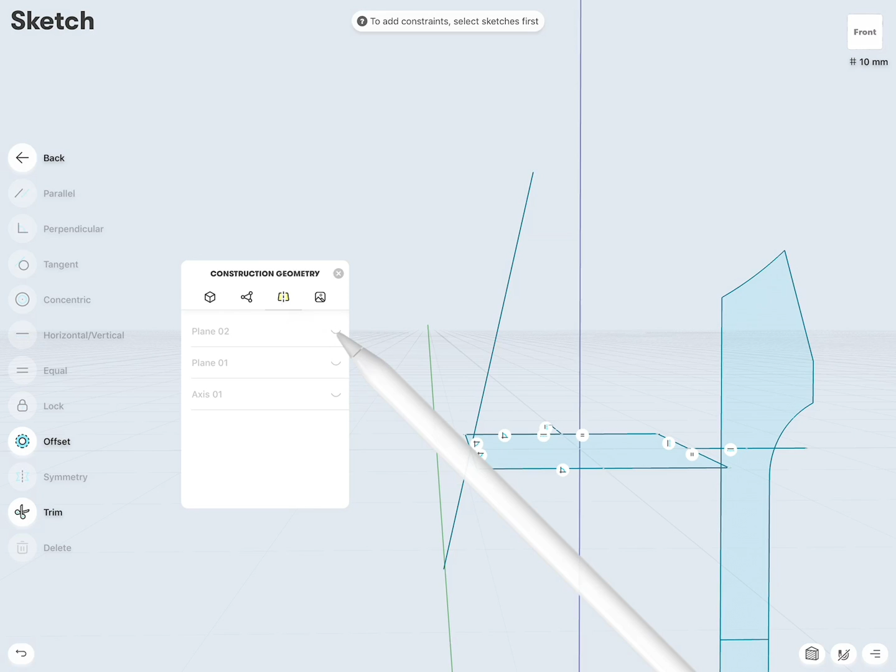this surface. This might actually right now sound a little bit complex. So give me a moment to demonstrate that to you. We zoom in a tick more. And then there, I think this is very close. Very good. Okay. Now this I hide. New group is selected. This surface I select, and I'm drafting this up, and this is drafted up much bigger than needed, so I'm overbuilding this. So now we can see how tall it is.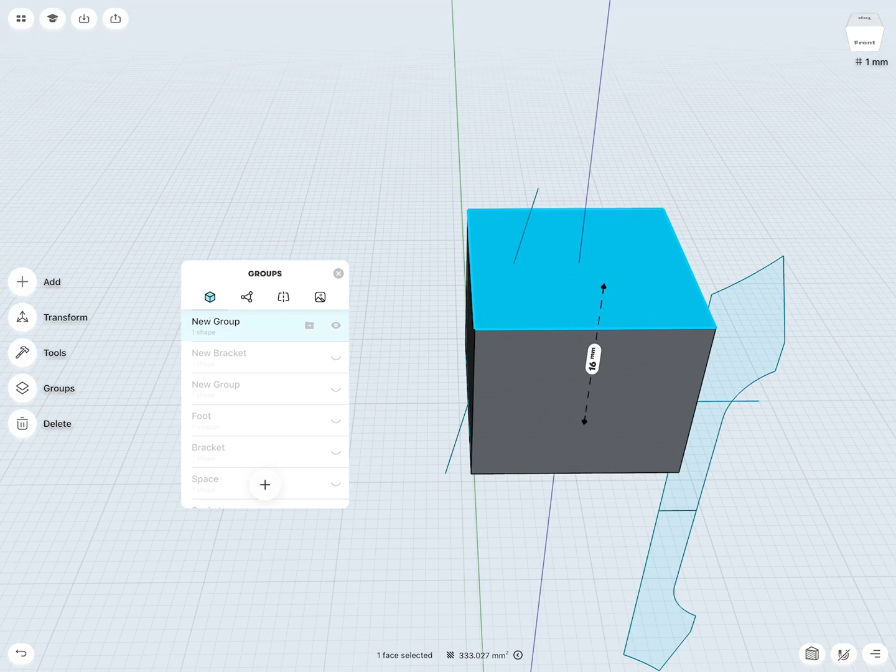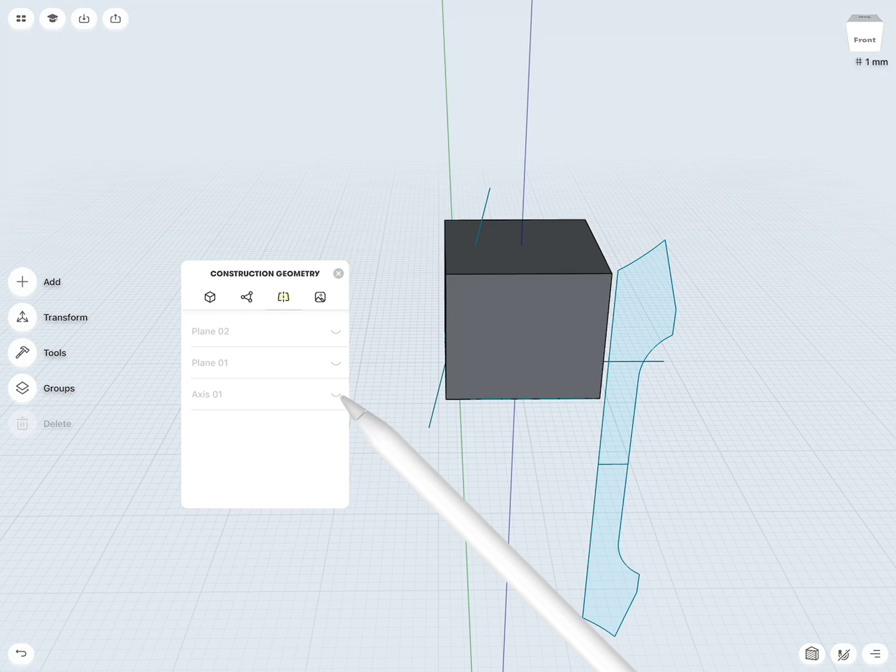And this face now I'm going to scale, go to transform, move, rotate, scale. This is my center point. This should really be at the center of my rectangle because the rectangle was designed symmetrically in my design. This is great. Also here as a little tip, when we have these axes, we can use those for snapping too. And then we zoom in and there's this yellow icon, and that's for scale. And you see by scaling this top face, I'm tapering that surface. There we are. Good.

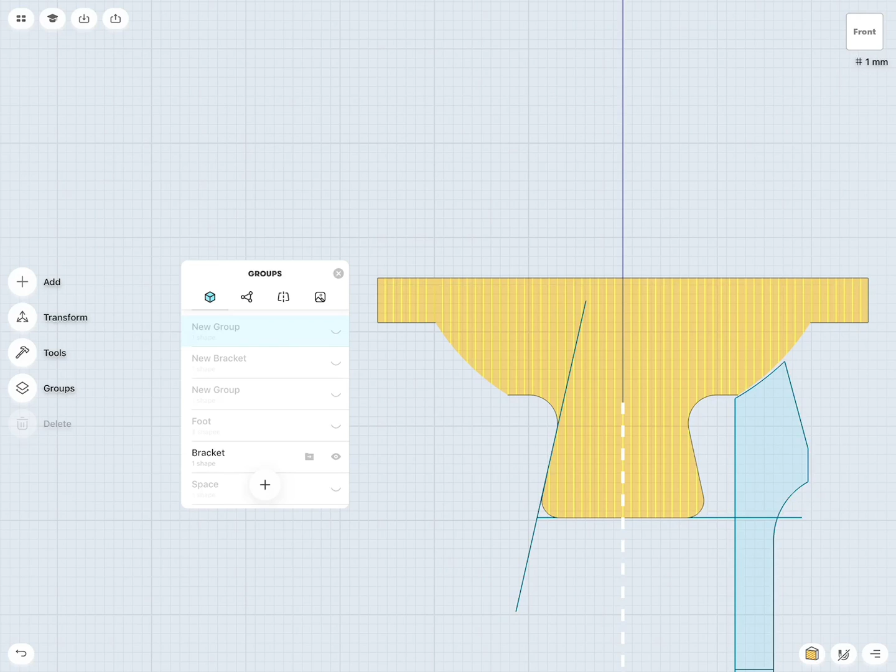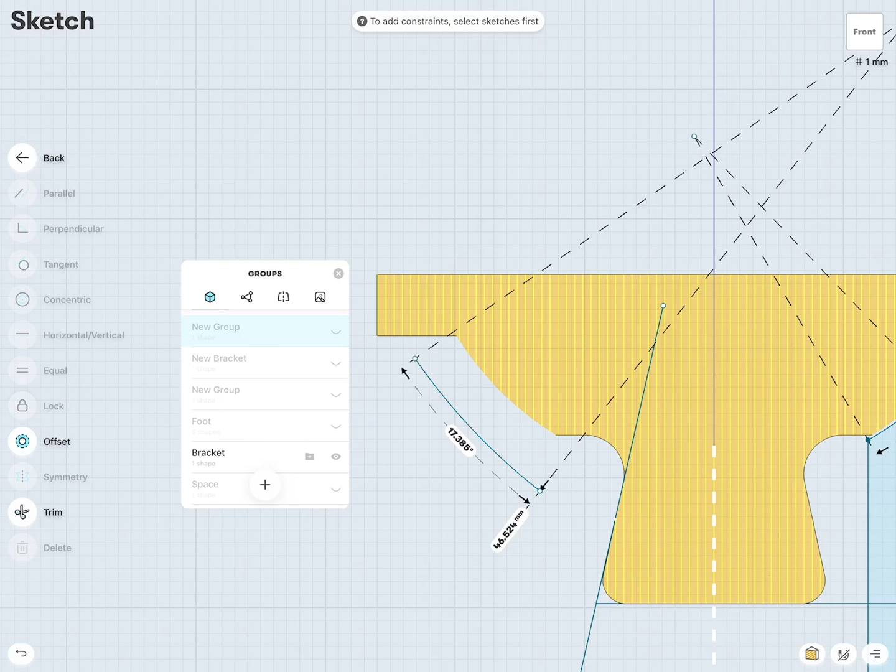Then let's maybe show this. So there we have a little gap there now. Not a big deal. We also need to create our arc. Because this is metal, this is pretty heavy. For 3D printing, we could keep this more solid. So we will actually cut out, we will create this outer arc and then add a revolve object and then fuse everything together. So to do this, let me just create an arc. I will hide this for the moment.

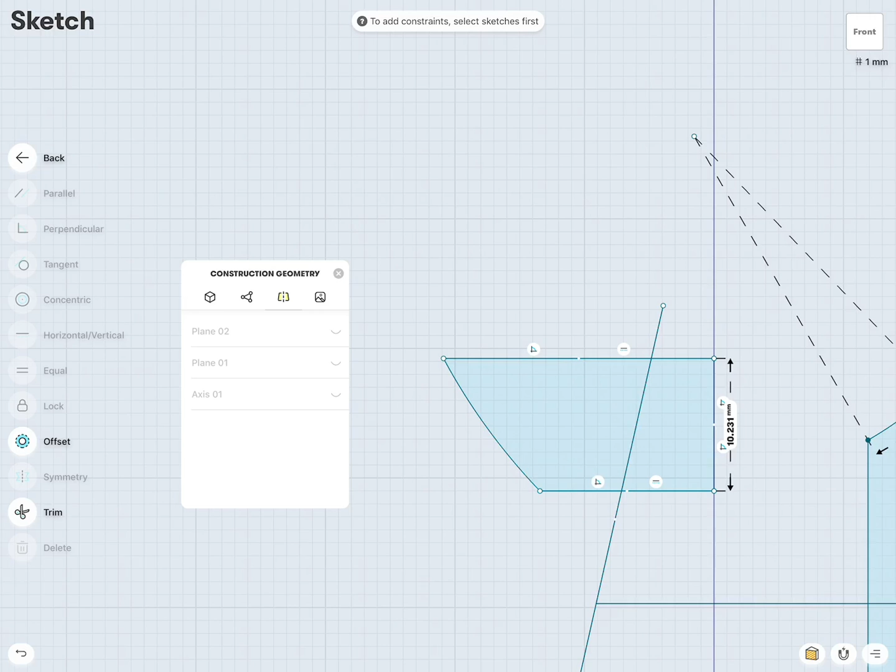Then here, whoop, I will draw a line to the center. Snap to grid, keep this turned on. Draw a line. I might turn the axis off for the moment. Draw this down. Very good. Now we can try to adjust this as needed. I might turn off the grid again. The snapping, bring this to there. And so I moved this one further up.

That's called overbuilding. I want this to intersect with this top area so the volumes don't sit next to each other, but they're kind of like being put into each other. That helps a lot of programs to really understand how to do the volume calculations. It's just a really good practice to do that. Okay, now we could refine this a little bit more till we have the right angle. Because we are short on time, I keep it at this.

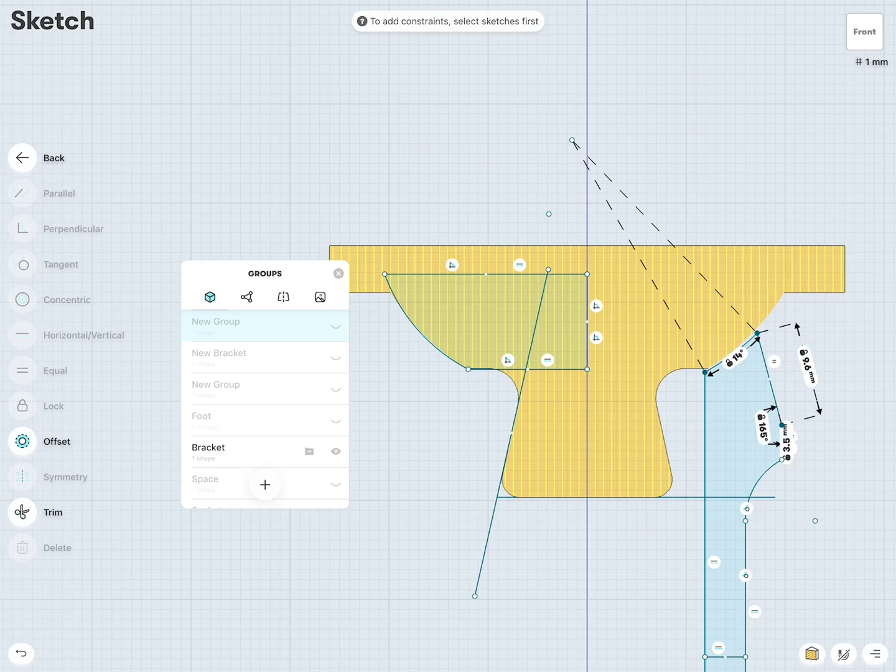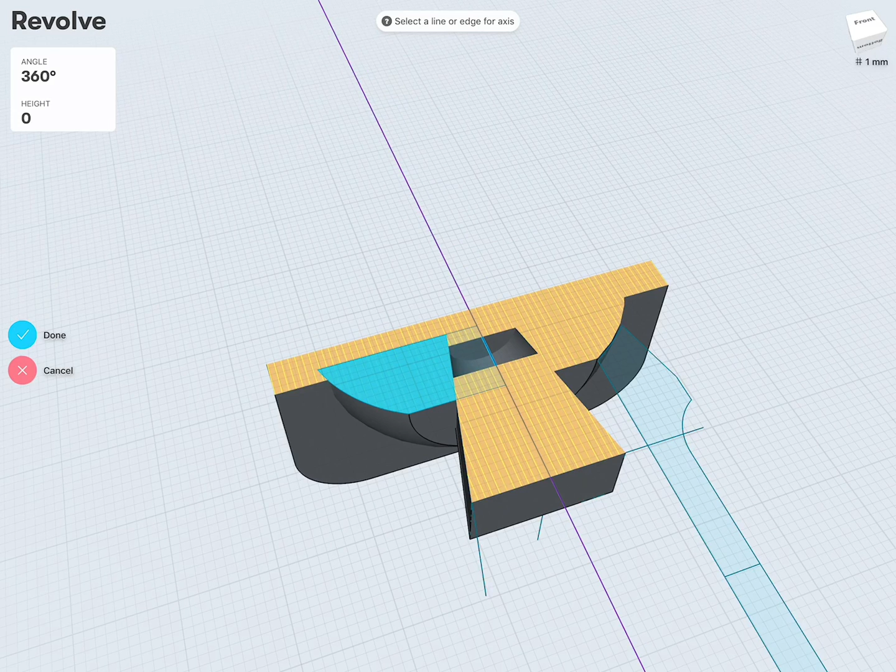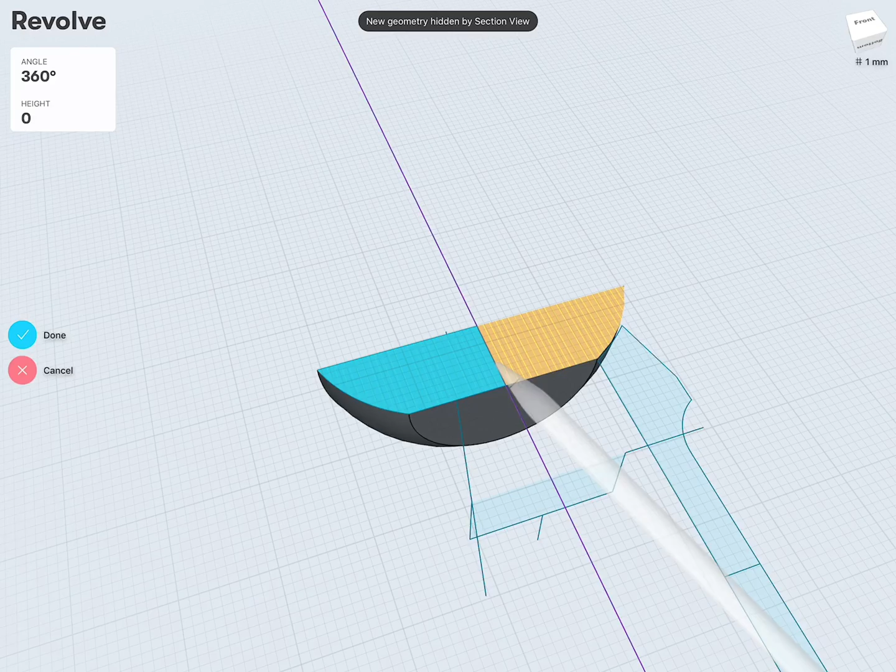So we can take a look at all those objects we have. Then we go to tools and we go to revolve. You revolve around this line and this and this and this, and there's some things happening. So what will help here is I will make a new group, so I can just select these surfaces, revolve around this edge there. Very good. Then let's turn this one off. Whoops.

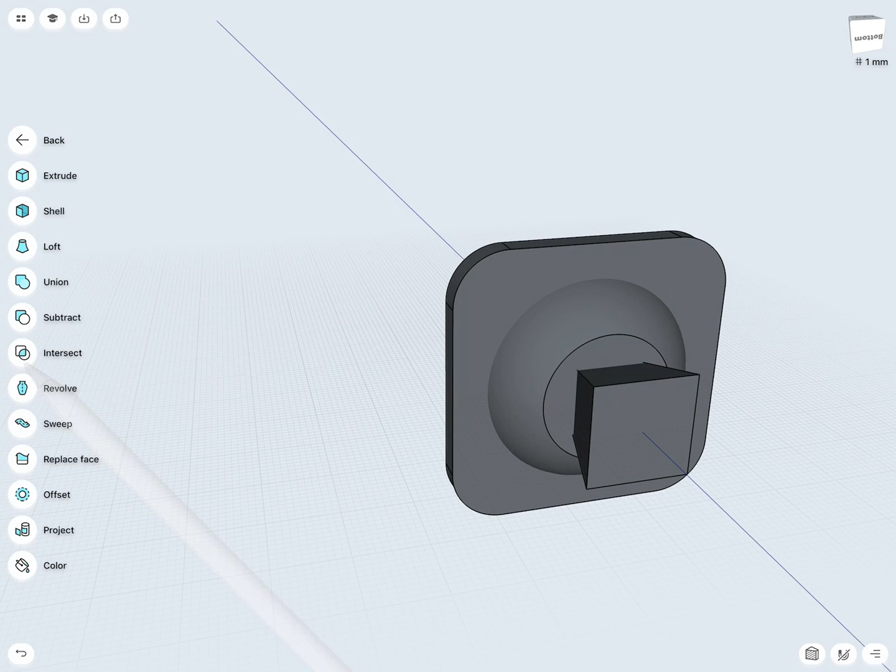Take a look at these 2, 3 objects, and we can fuse them all together by going to tools, union 1, 2, 3. Double click, and there you see this is now one object. Cool. Oops. Let's go back to there.

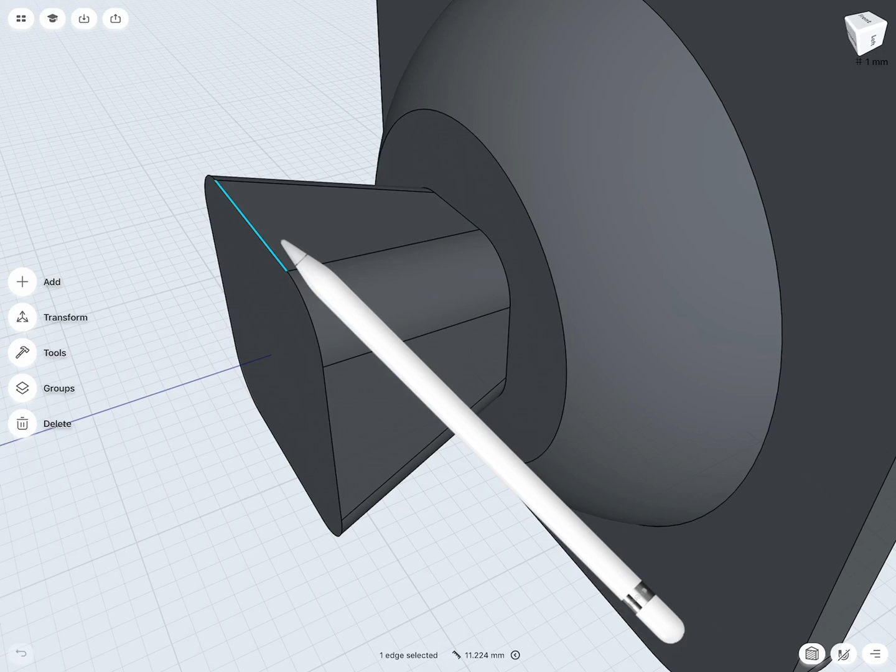And the last thing now we need to do is round, for example, these edges there. Careful what you select. I selected the faces. Then a nice rounded feature there. I only need one edge there. I can just round it as needed. And also here, select one edge because they are tangent to each other. The software understands to run the rounding all around it. So we have kind of like 20 minutes left. That's very good.

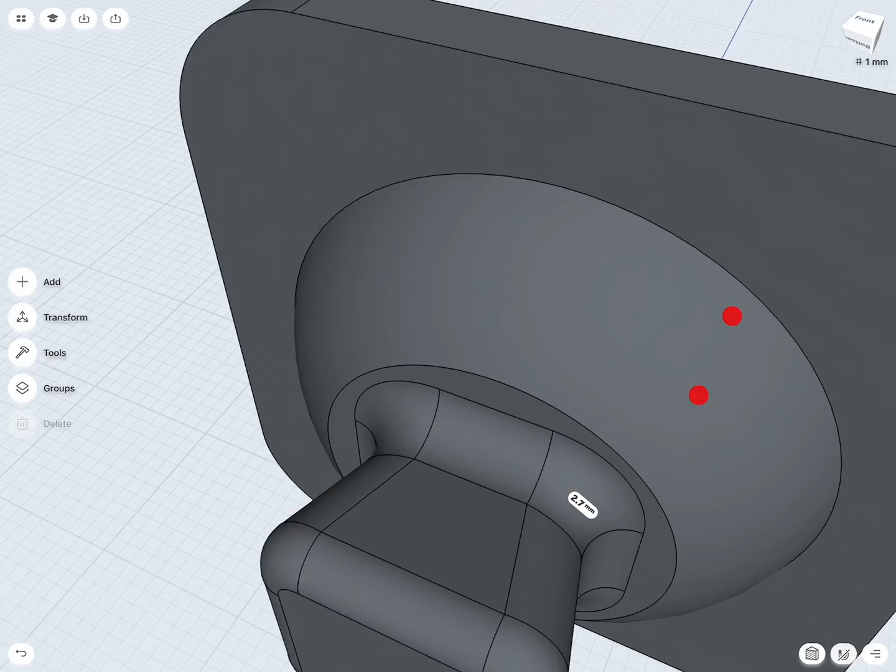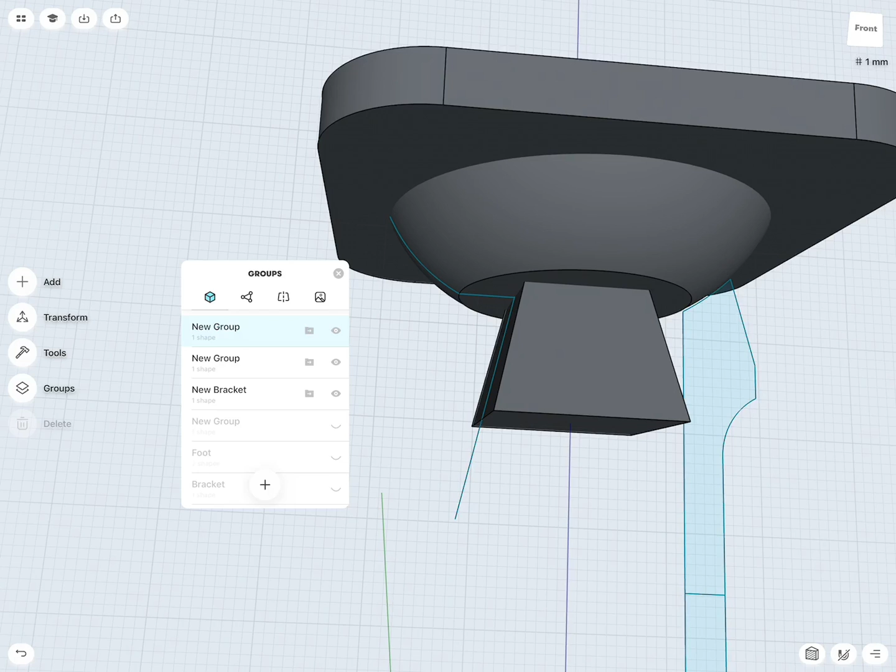Because I want to go a step backwards. Do we have all the individual objects? Yeah. So you see that I built everything as individual parts. That helps me a lot, so I can manipulate each individual element, and then when I'm done, fuse everything together. For example, here, this face should, where it meets this line, have a smaller radius than this face.